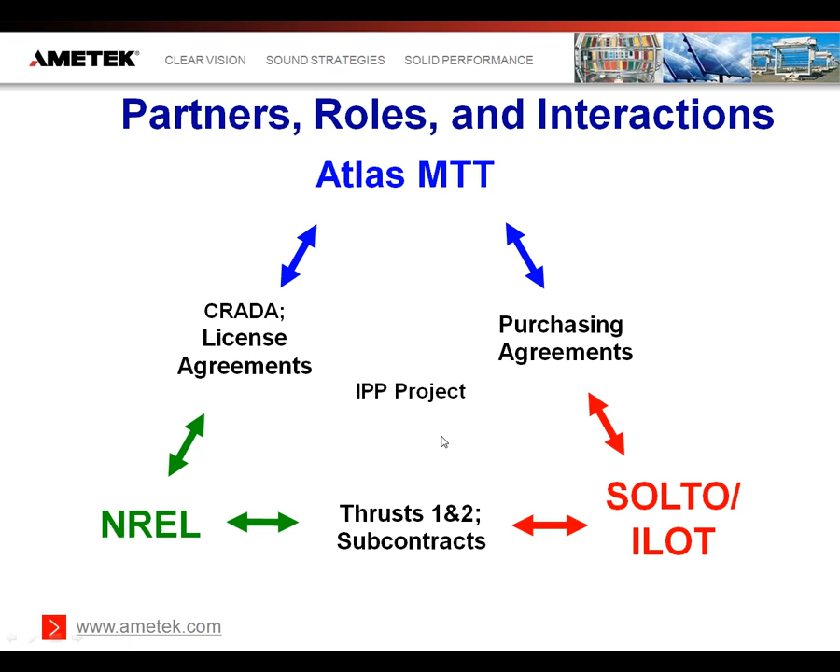It's truly a great event at several levels of context. Speaking of context, I have a general comment on the content you'll see this morning. We're going to review considerations for ultra-accelerated weathering from two points of view, both general and specific. In general, these considerations can be applied to any accelerated methodology. There are a number of ways to achieve weathering results very quickly, and certain principles apply no matter what technology is involved. But specifically, we're going to review methodology using a new commercial device that was developed under the IPP program, and experience with the ultra-accelerated weathering system, or the UAWS, really highlights the more general considerations. So if you think about both general considerations as well as specific aspects as the presentation unfolds, it might provide more value.

Well, to begin, let's set the context and talk about what we mean by the term ultra-accelerated. As we look back across weathering methodology, we can group approaches into three general categories with similar sets of considerations: real-time weathering, moderately accelerated weathering, and most recently, ultra-accelerated.

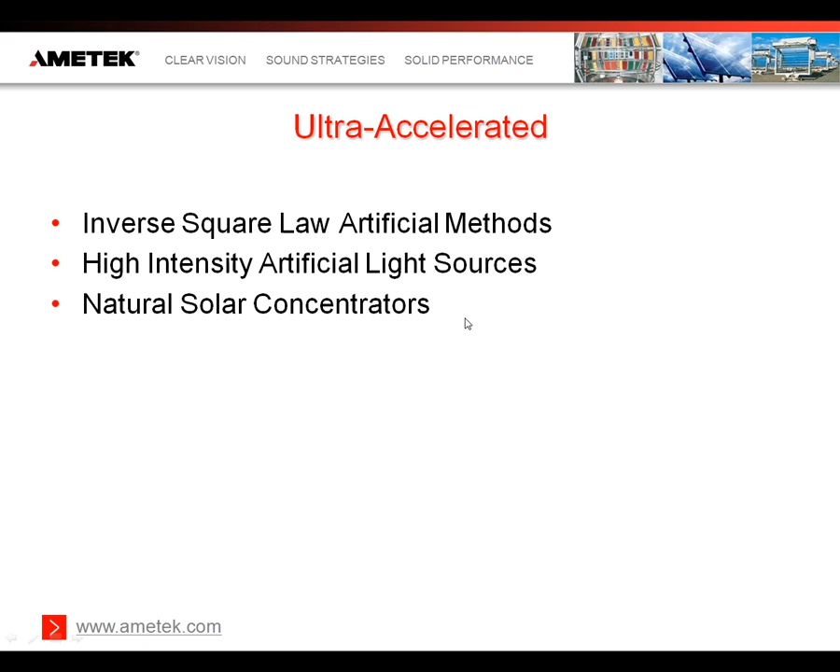So we can see this general developmental trend in weathering technology, but I want to emphasize three points. First of all, these methods should be used in concert. No good weathering researcher using accelerated methods should depend on the results of a single methodology. It's the preponderance of evidence from different data sources that should be used to characterize weathering behavior.

The second point is that real-time weathering is not optional. It's a requirement for good weathering research. It is the baseline, the reference for good weathering researchers, and good weathering researchers always precede accelerated weathering with real-time weathering.

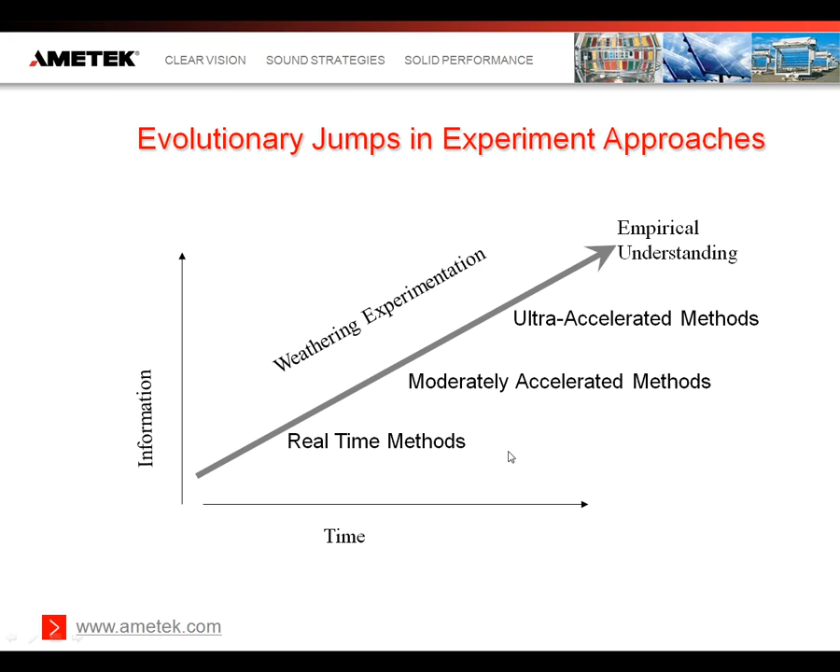And the third point is the radiometry. The measurement of UV radiant exposures in these methods is always a critical consideration. So with these general considerations mentioned, let's begin to discuss some more specific elements.

It's kind of ironic that what we're trying to do with our ultra-accelerated weathering concentrators is almost the exact inverse of what Lavoisier was trying to do with this. He was trying to generate great heat in the absence of oxygen in order to reduce oxides. We are trying to oxidize materials in the absence of heat, in order to photooxidize rather than thermally oxidize materials.

Anyone who's ever started a fire or melted a piece of plastic with a magnifying glass knows things heat up under solar concentration. Well, how do we keep things from getting too hot under concentrated sunlight? That would be the 800-pound gorilla sitting in our laboratories. So let's talk about this for a few minutes. I believe weathering researchers need to become experts in the application of the energy balance expression.

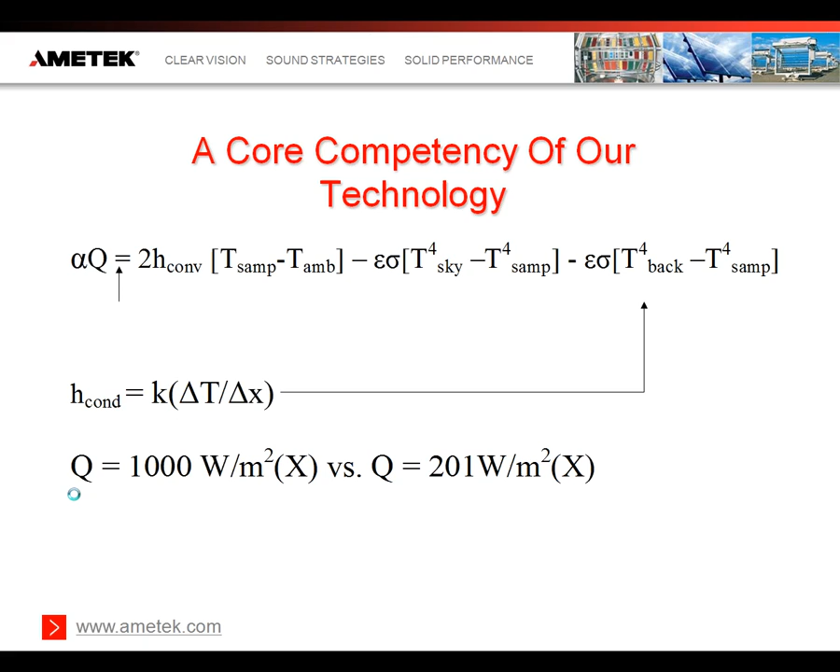Let's look at this expression in a different way. This is the same expression but solved for a specific case, the black panel temperature. And we're looking at this on an EMA device.

Now, even with no cooling, we can see a big reduction in temperature across all different concentration factors just by filtering out infrared from sunlight.

Now, most of our clients are a little concerned about exceeding a maximum end-use condition temperature, so they give us a hard ceiling right around 80 degrees C. And now our job is to exploit that energy balance equation and bring these black panel temperatures under 80 degrees C at these high concentrations.

Well, one of the easiest things we can do is simply add some convective cooling air. And if we add a 37 mile per hour blown air onto the black panel, we can achieve these reductions as predicted by the energy balance equation.

And if we do that with natural solar, we achieve predictions of our EMA exposure. These dashed lines now show the condition when we add convective cooling to the total solar and add convective cooling to the UV only temperature predictions.

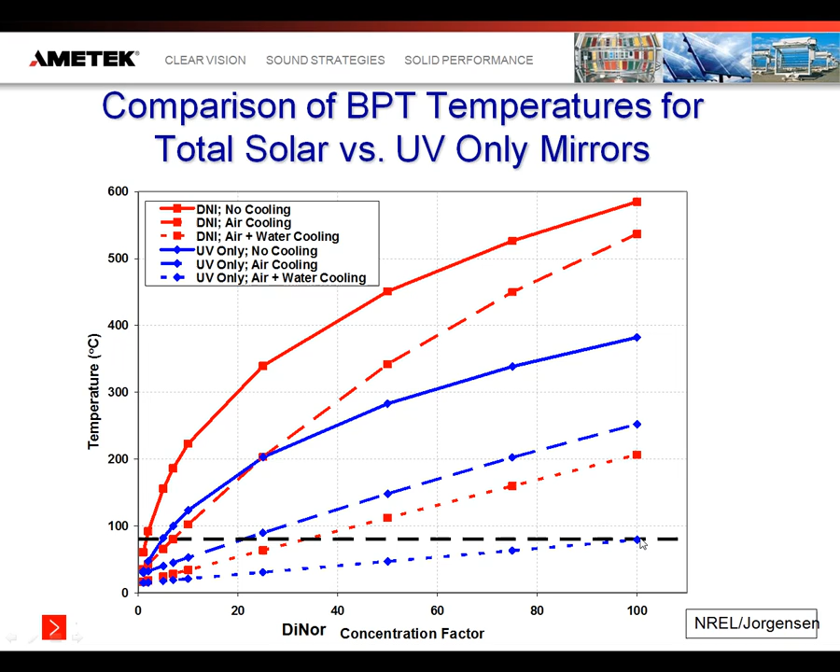The theoretical predictions are always based on assumptions that don't usually appear on the PowerPoint slides. So how does it really work?

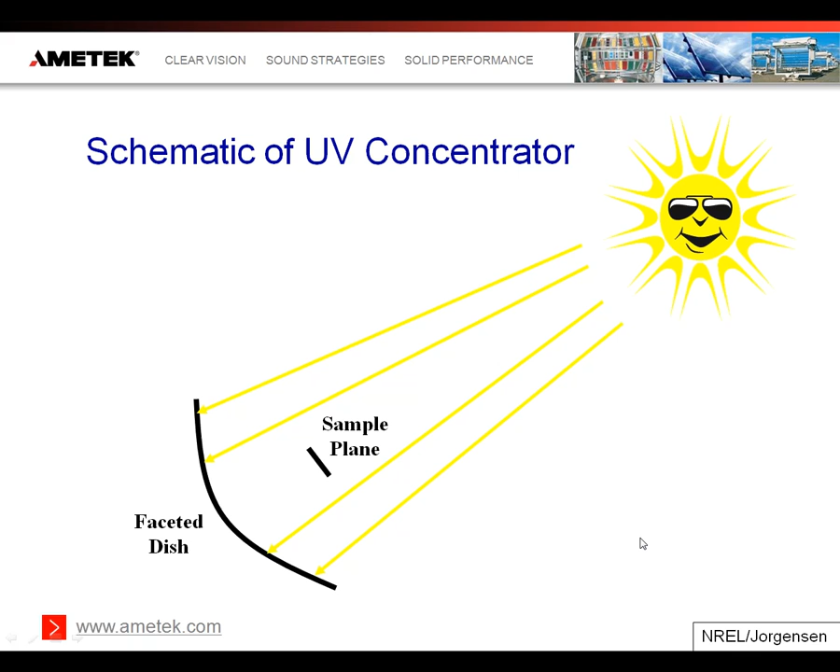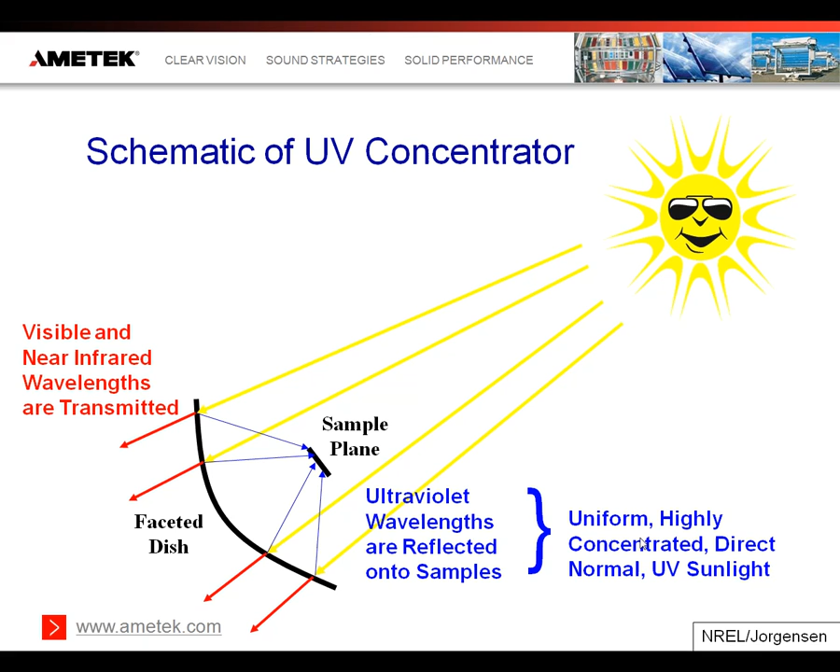We built mirrors that transmit visible and infrared but reflect solar ultraviolet onto a sample. The mirror surface is made up of many layers of two materials with very different refractive index. At specific thicknesses, the change in refractive index reflects specific wavelengths of light. You build up layer after layer on glass by evaporating metal oxides onto the surface under a very high vacuum, altering the thicknesses of the layers to obtain a specific reflectance spectrum.

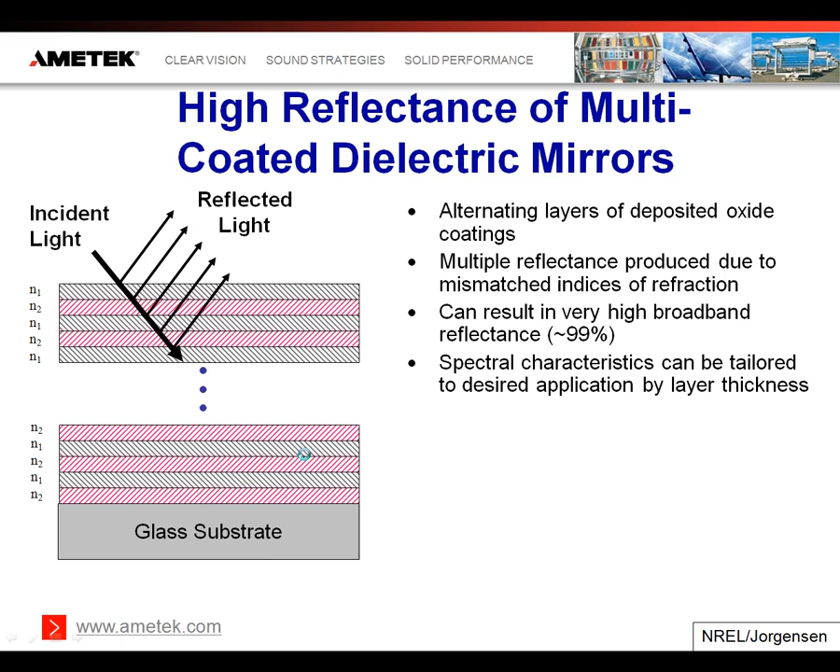It took a lot of long, painstaking work by our Russian partners, but we finally ended up with this reflectance spectrum for these mirrors. As you can see, the mirrors do not reflect much of the infrared, but have very high reflectance in the solar UV. The result is you will not reflect the wavelengths that only result in thermal load, and you'll end up with reduced Q.

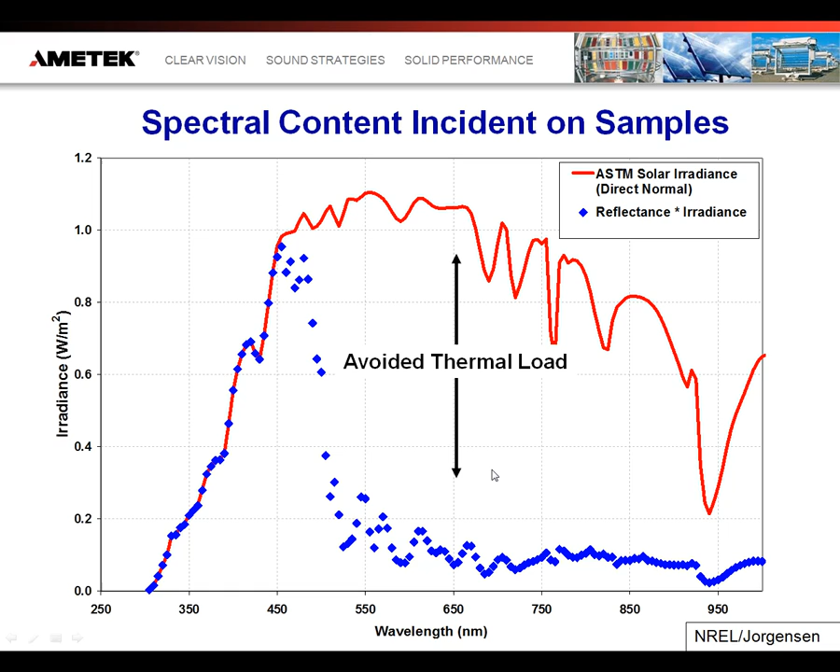But we still need to keep the wavelengths from the solar spectrum that have enough energy to break the bonds and initiate photooxidation. So we built a concentrator using these amazing mirrors.

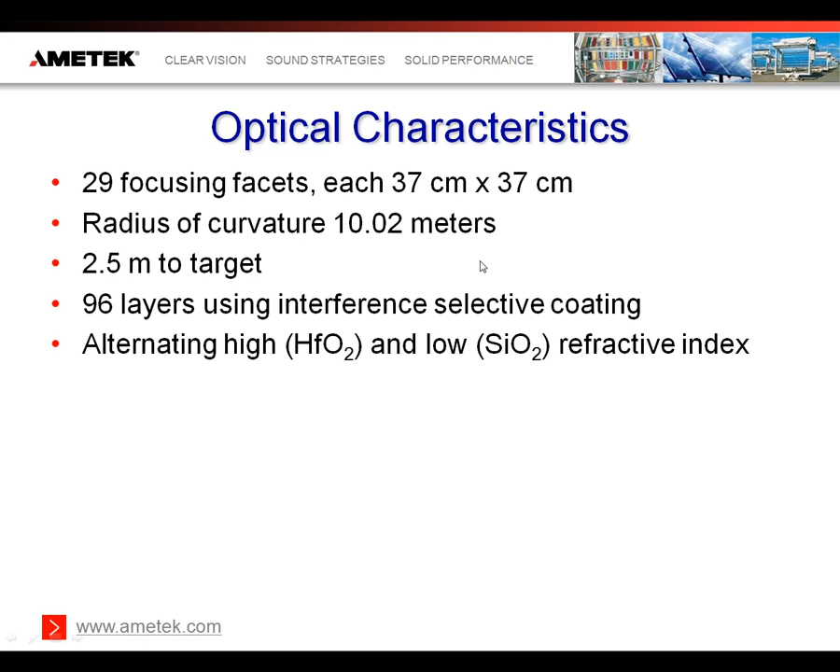We used 29 mirrors in the concentrator design, and we shaped the surface of the mirror to a radius of about 10 meters. These are focusing optics with a 5-meter focal length. We placed each facet on a 10-meter radius support structure, and then placed the target area about 2.5 meters towards the focal point.

We mount these facets onto the support structure, and mount the support structure onto a tracking mount that will allow this to follow the sun. Then we place a target area out where we will be focusing the solar radiation.

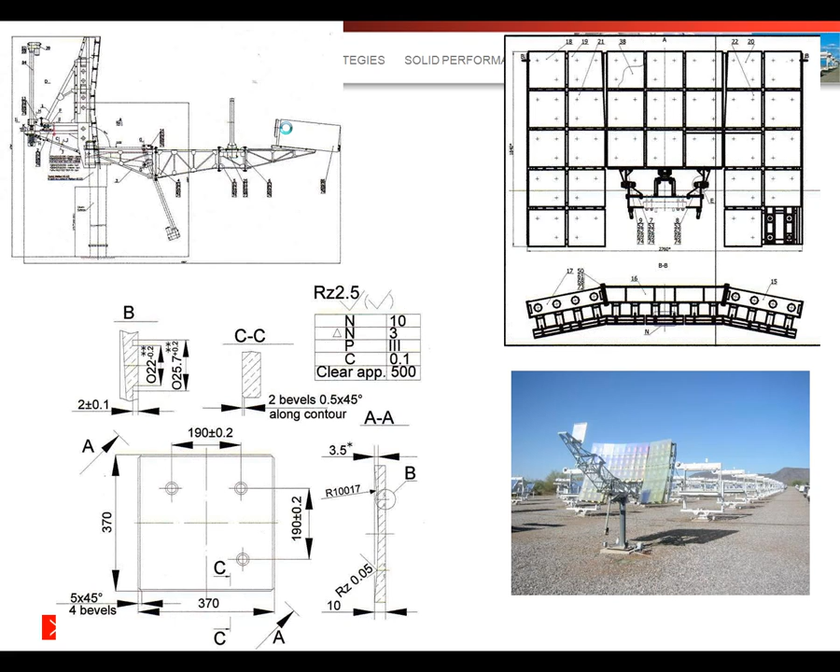There are two distinct features I want to point out about this design. The first is that the target area is not all the way out at the focal point of the optics. We have the ability to move the target area further back and achieve even higher concentrations than we'll talk about today, but there's a sacrifice in target area the farther towards the focal point we move it. So there's this inherent trade-off between concentration and target area.

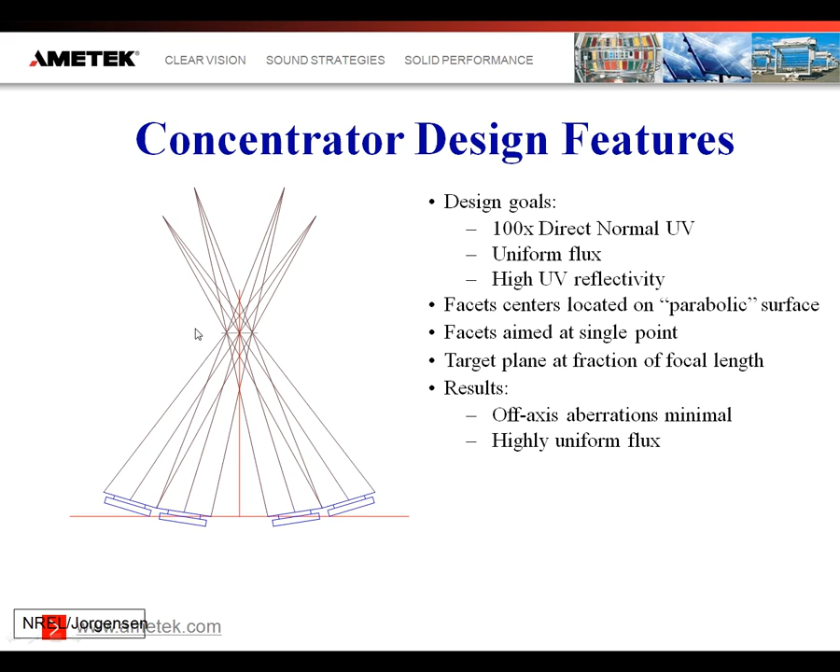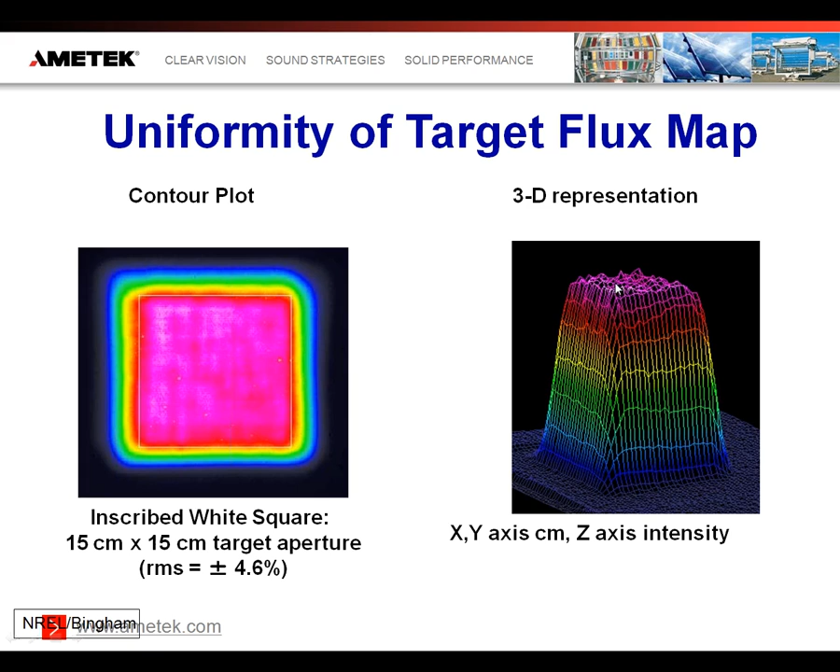One final note on that mirror surface: the evaporative coating appears extremely robust. 8 years ago I attached one of these witness coupons to the mirror bed of a traditional EMMA machine, and that sample had seen sun, rain, dirt, washing and abrasion, but it's still within the error of the narrowband UV reflectometer measurement. It's shown no measurable degradation.

Whenever you introduce a new weathering technology, usually the first comment you get is something like, 'Show me some examples of correlation.' So that's what we'll do now.

For initial studies, I wanted to show some materials with very different characteristics. So I chose a reflective paint and a transparent plastic to work with. These two are very different classes of materials: this is a thin film, this is a thick plastic.

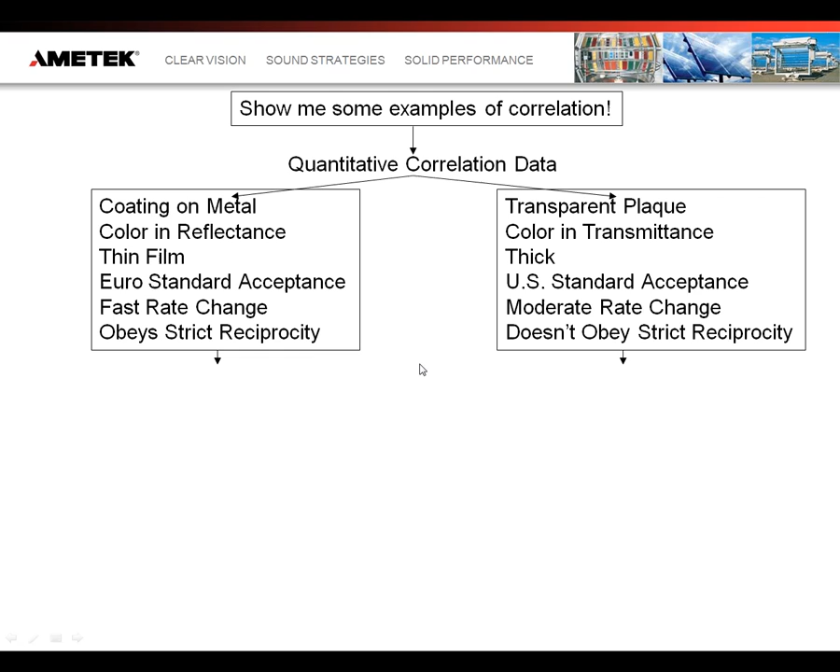I needed some initial data quickly, so I used fast and moderate rates of change. I wanted a material that obeyed strict reciprocity, and another that didn't — we're going to talk a lot more about reciprocity in a minute. I also wanted materials that had been exhaustively characterized, were instantly recognized by the industry, and were readily available for anyone who wanted to confirm my work.

Which led us to the ORWHET standard reference material and the polystyrene standard reference material, which fulfilled all the requirements and are specifically meant to be used as reference materials for testing weathering methods.

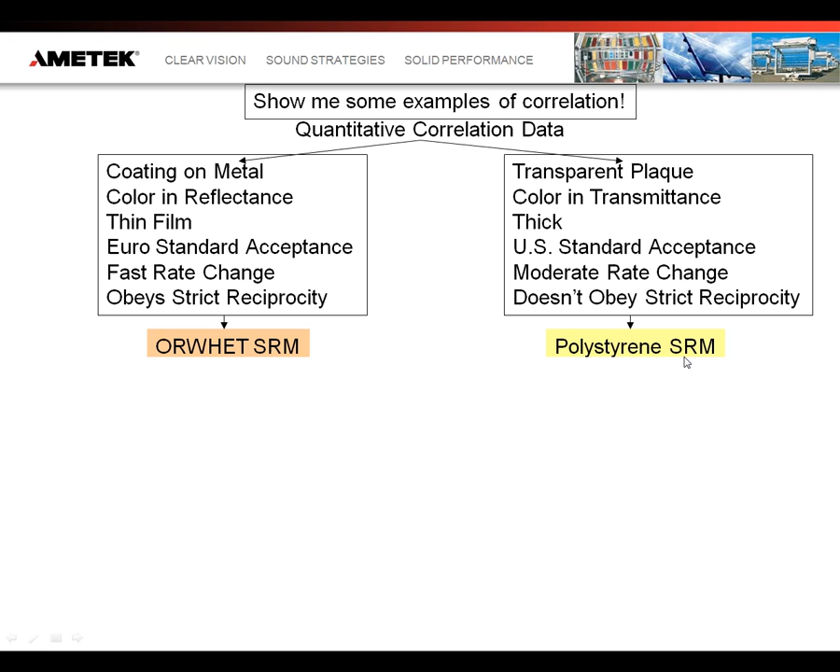Now the ORWHET is a European standard reference material, produced by EMPA. It's a pigmented thin film, a paint of melamine resin with a Ciba pigment on aluminum. It's been very highly characterized for color change as a function of UV exposure.

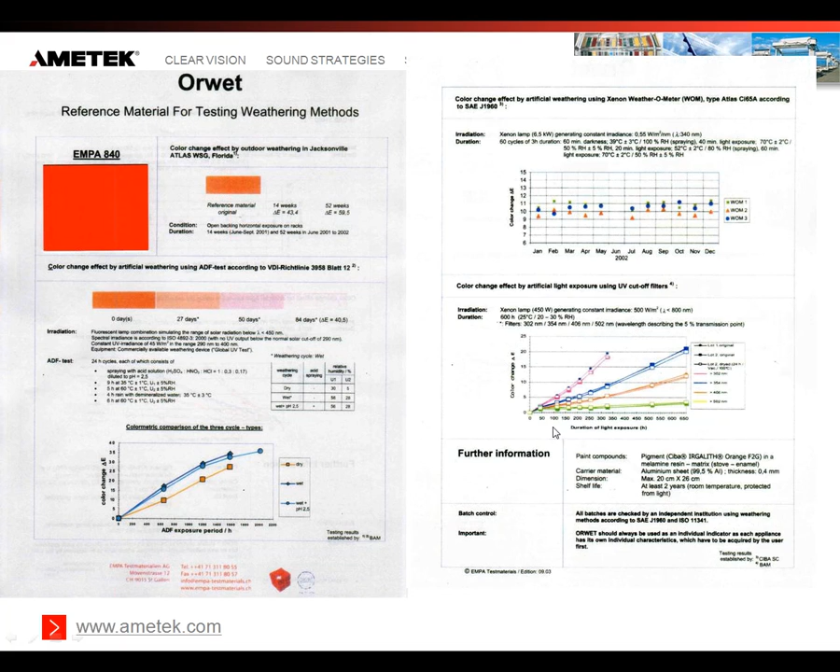Now the polystyrene is a United States standard reference material produced by IFAI. It's a thick, visually transparent thermoplastic, again highly characterized for color change as a function of UV radiant exposure.

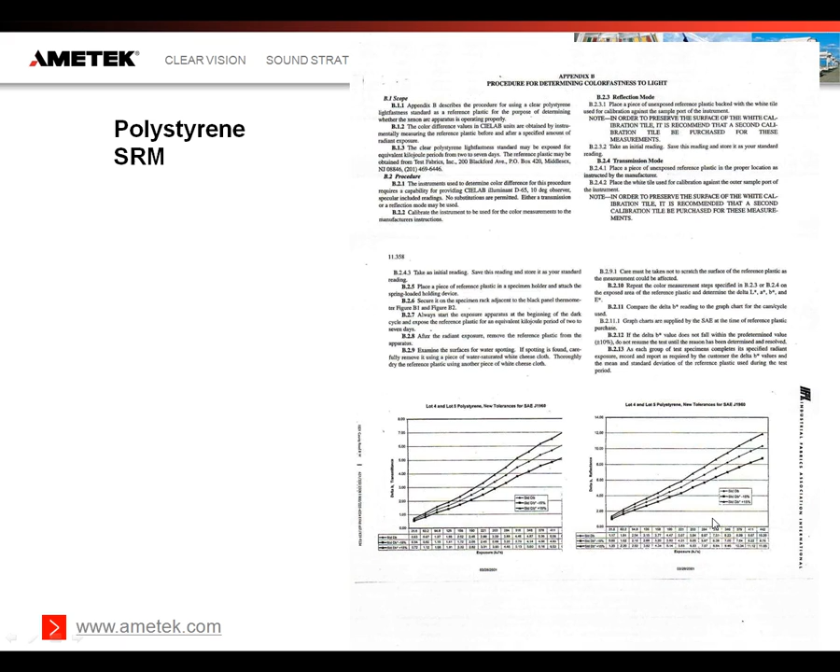Most people ask about correlation, but what they want to see is both the quantitative correlation, which tells us how well the new device simulates the natural degradation function, and also acceleration data, which tells us how fast the device will perform that simulation.

So we're going to look at two sets of graphs: one with the x-axis normalized across different exposures by radiant energy in joules UV, and another graph with real time on the x-axis. We're going to compare some real time, some moderately accelerated exposures, to ultra-accelerated exposures.

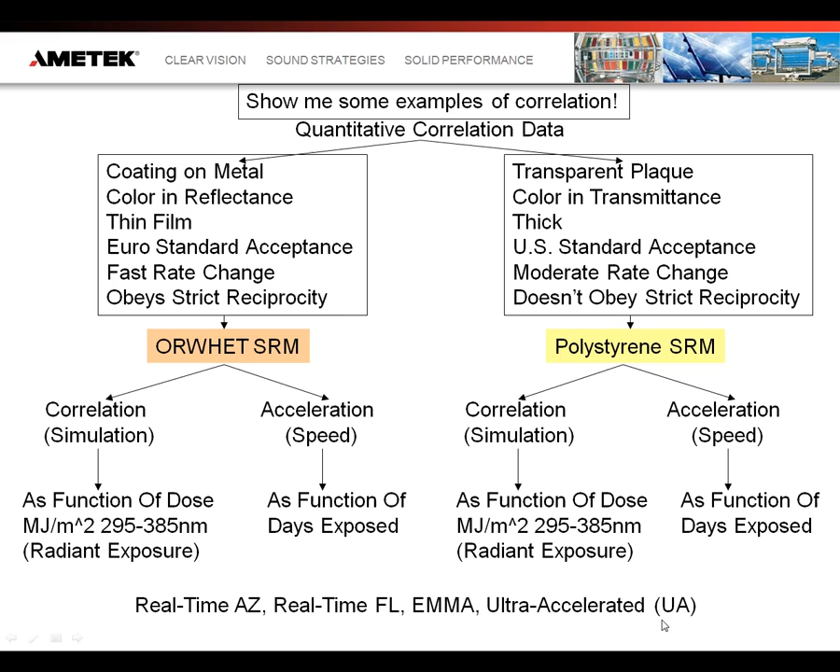Here we have a correlation graph comparing different exposures of the ORWHET SRM. In this correlation graph, we're normalizing for UV radiant exposure, or megajoules per meter squared UV, on the x-axis, and the y-axis is the property change as a function of UV exposure.

Here are three exposures: natural real-time. The RTs are real-time, and they are in Florida and Arizona. We also included a moderately accelerated exposure, the EMMA, which is also in Arizona. That's these three exposures here.

Now the red diamonds show that the ultra-accelerated exposure follows the Arizona real-time exposure very well. It really just doesn't get any better than this.

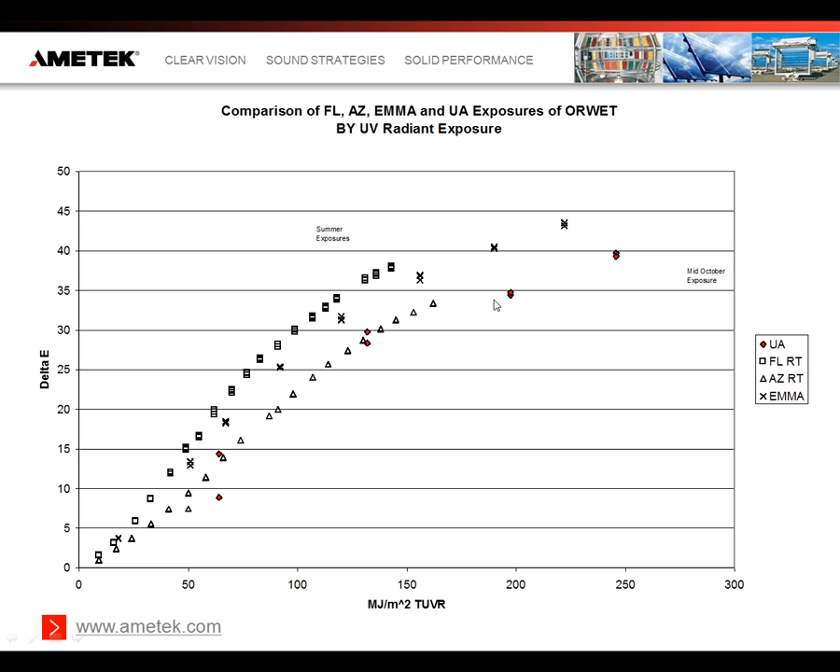And then you say, well, that's great, but how long did that exposure take in days? How accelerated was it? So now we're going to change the x-axis to days. What we see is that what took about 140 days in the real-time exposure took only 1, 2, 3, 4 days on ultra-accelerated. That would have taken about 60 days on the moderately accelerated EMMA.

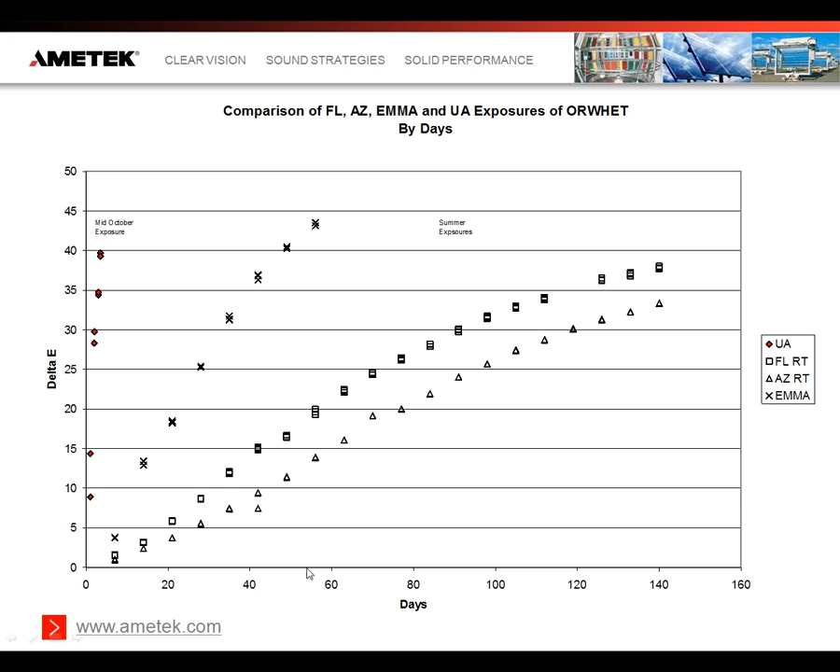So these two graphs, the correlation and acceleration of ORWHET, were the results of the first experiment on the new device. But it's not just a matter of exposing things to high irradiance.

Anyone can simply pump up the energy. Anyone can move a sample closer to a xenon source, use the inverse square law, or expose to multiple metal halide sources, or use more reflected images of the sun.

The trick is exposing specimens with ultra-high irradiances with ultra-high fidelity to the natural spectra without the specimens melting or burning. That's the trick, and it's not easy. And anyone who's run the energy balance calculation or done the empirical work knows it.

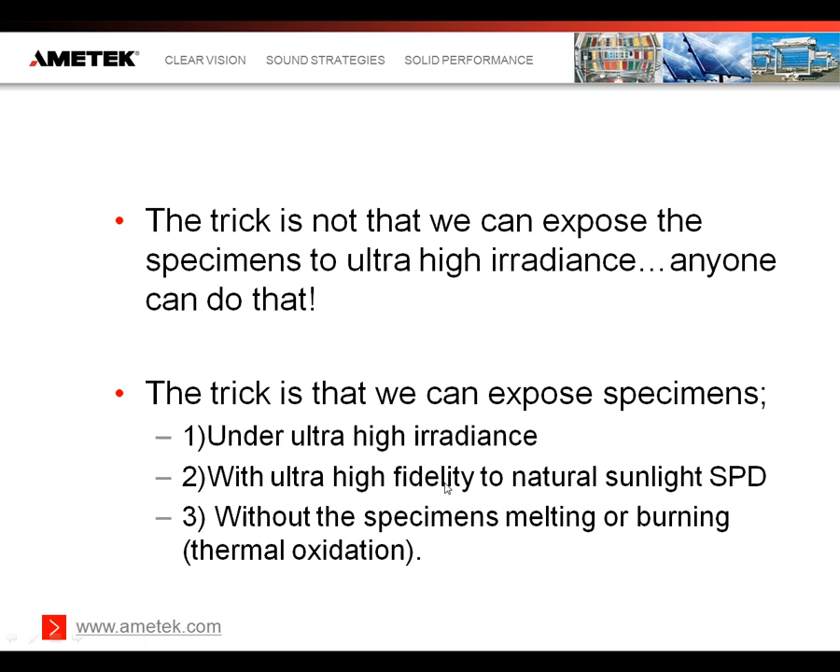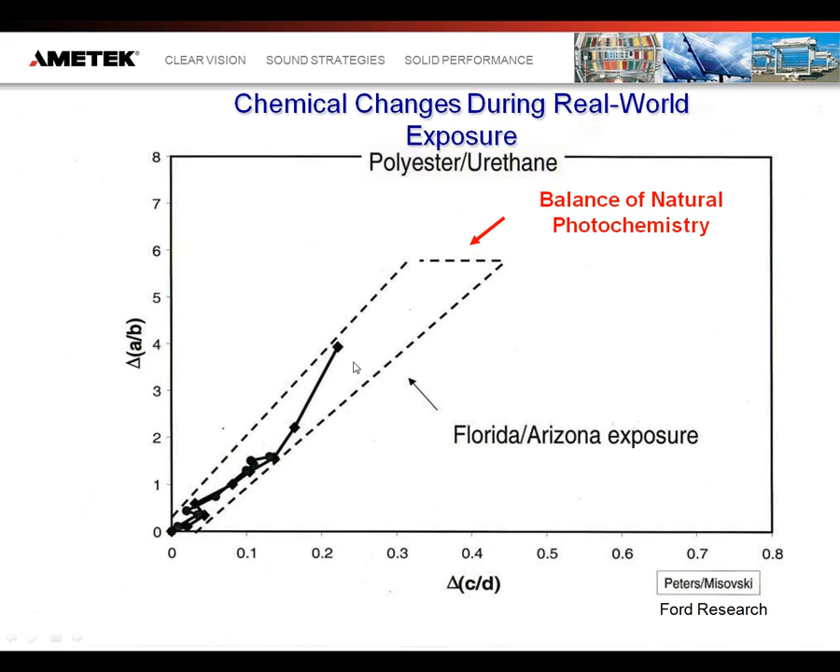But what's this bit here about spectral fidelity? In an extraordinary set of publications, Ford Research put forward what is pretty much now a generally accepted hypothesis: that in order to get the weathering photochemistry right, you have to get the light source to mimic the outdoor natural solar spectra. So Ford watched chemical changes in the natural weathering and compared them to the chemical changes under artificial light sources.

Now, one of the light sources showed exceptionally good simulation of the natural photochemistry, and that was the concentrated natural sunlight in EMMA, the ASTM G90 method. Since this work, Atlas, Ford, and Schott have developed a right light filter for use at moderate xenon acceleration.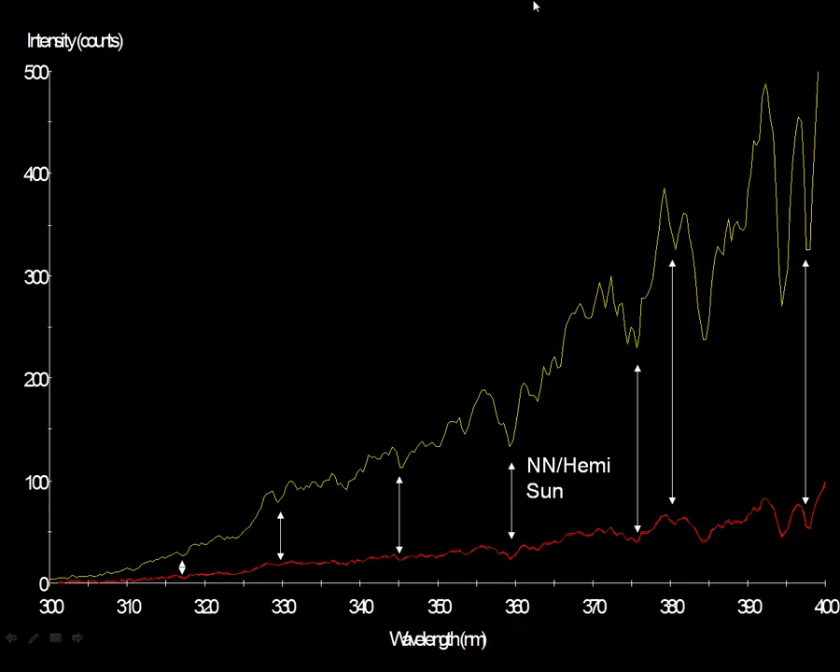Now, keep in mind that the new device we're working with now is an order of magnitude greater than EMMA, so fidelity may be extremely important.

At some point, we may have a problem because things are changing so fast we can't measure them with the proper frequency. Okay, great—acceleration for polystyrene. Now what about correlation?

We normalized the data by radiant exposure on the x-axis, and on this material we see departure from correlation. Although I've seen worse correlations published, and these trends are still going in the correct direction, we need to figure this out and understand what's going on here.

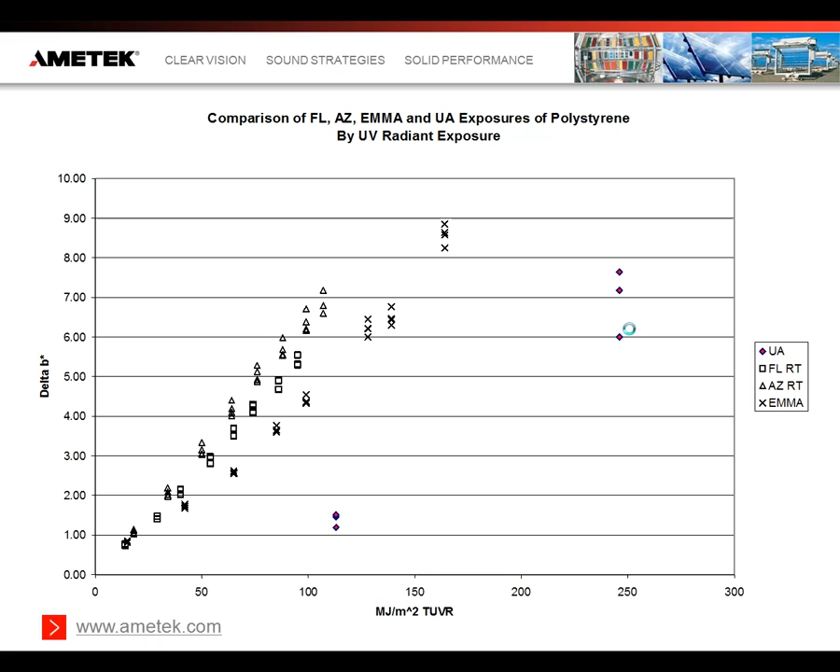This is where some in the industry go, well, let's skip the quantitative and use the Spearman rank correlation. Well, this is where we begin to talk about the other 800-pound gorilla sitting in our laboratories.

I first published on reciprocity in 2004. I wrote another paper on it in 2005, and a third in 2006. The concept of reciprocity is a foundational concept of our industry, and it influences our science whenever we time two

different exposures by radiant energy or dosage, or plot two different degradation curves with joules on the same axis, or infer the equivalence of 300 megajoules of UV in artificial exposure with a year in South Florida, or use a pulsed xenon source. It's the unspoken industry standard of operation.

It's an underlying assumption of much of the current weathering methodology. It's really the wisdom of the herd that's helped us evolve through moderate acceleration. When I began working with this, NIST referred to it as the law of reciprocity.

And it's really a simple logical concept. Materials react to energy, and energy is the product of intensity times duration. An exposure at twice the intensity for half the time is the energy equivalent to an exposure at half the intensity for twice the time. Watts, that's intensity, times seconds, that's duration, equals joules, energy.

And we time exposures in joules of UV. But at this point, the conventional wisdom of our industry makes a logical leap, and it says that within limits, these two exposures are equivalent, and they should result in the same property changes, all other things being equal. The within limits being that you can't get the intensity so high that you burn the materials, for example.

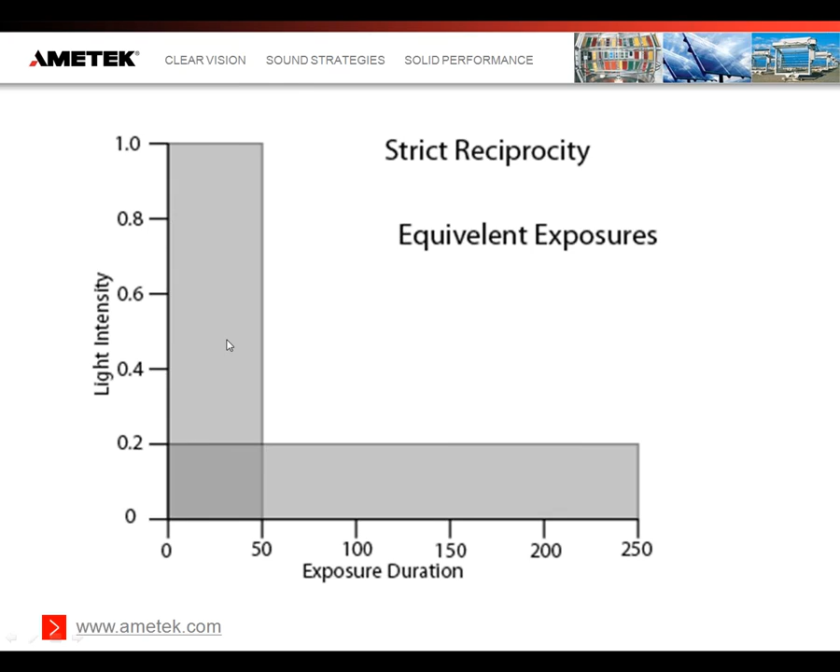You can characterize that concept in a function which has a characteristic shape and has the variable raised to the power of -1. That is a mathematical definition of strict reciprocity.

But around 2002, something happened to me that made me begin to doubt the human logic behind this universally accepted assumption. It required that we actually invent the apparatus we needed to study it, which, by the way, is patented—the temperature control EMMA suite of products at Atlas. We even have a patent on the methodology.

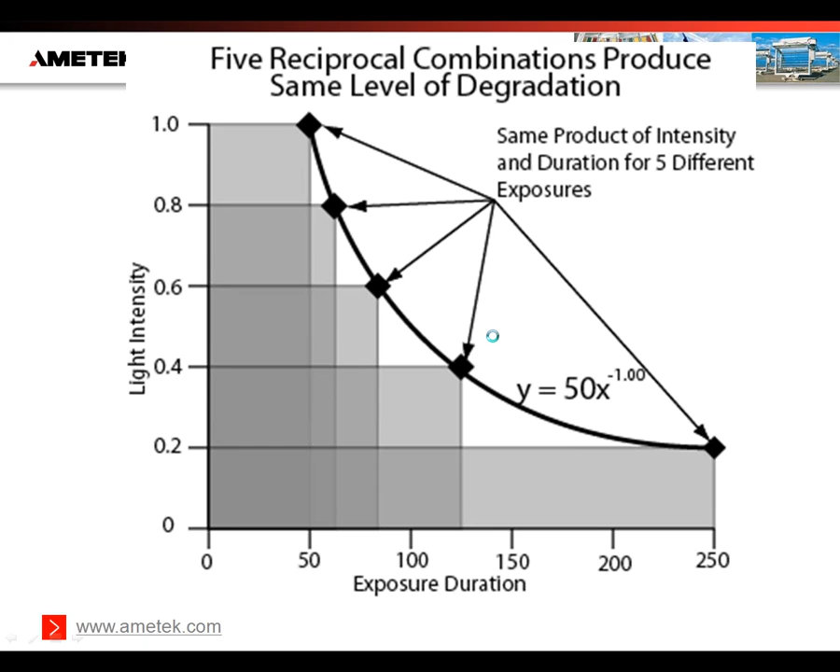So we tested our hypothesis with our new devices, and we compared predictions under the assumption of strict reciprocity with our observations. Once we had our data in a pile, we published this data at the Sedona Service Life Prediction Symposium. In this data, I normalized it to the results of a 10-mirror EMMA machine.

And I watched our observed values deviate from reciprocity as I removed pairs of mirrors while holding temperatures the same between these different exposures. The paper said that this strict reciprocity is no longer a valid assumption. We have observed significant deviations in controlled, repeatable experiments.

After I showed this graph, several other researchers stood up and confirmed the observations, saying they were using very similar values, like -0.63, as the exponent of their service life prediction models.

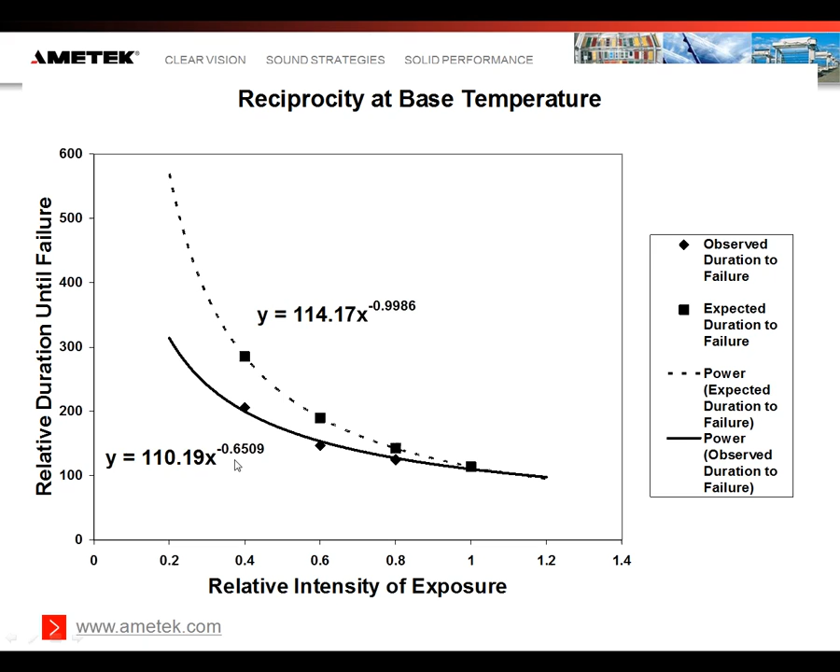Now I showed one more graph at the end of the presentation. That slide hypothesized what would happen if you took the intensity way out to ultra-accelerated levels. The crossover point here on this graph is a 10-mirror EMMA device.

That's moderate acceleration. And the pink dots are the observed deviation from reciprocity. If you follow these curves all the way out into ultra-accelerated territory, the assumption of strict reciprocity predicts that the polystyrene will degrade about twice as fast as the prediction calculated with the observed deviation from strict reciprocity.

The strict reciprocity prediction is here. It predicts the end of life in about half the duration of the observed reciprocity prediction. The observed reciprocity prediction is here, about twice as long as the strict reciprocity prediction.

Now at conventional method intensities, this effect can be lost in the noise. It's conveniently explained away. But at ultra-accelerated intensities, this becomes a critical consideration and it can't be ignored.

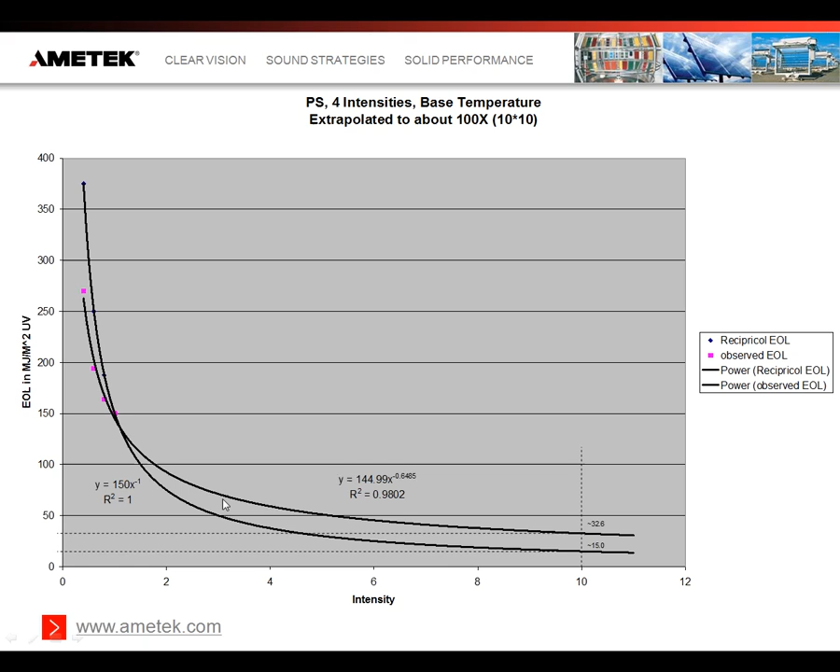Well, we waited about four years to be able to test this hypothesis. And you see how the strict reciprocity prediction takes about half of the radiant exposure of the observed reciprocity prediction to reach the same degradation point out here in this very ultra-accelerated area?

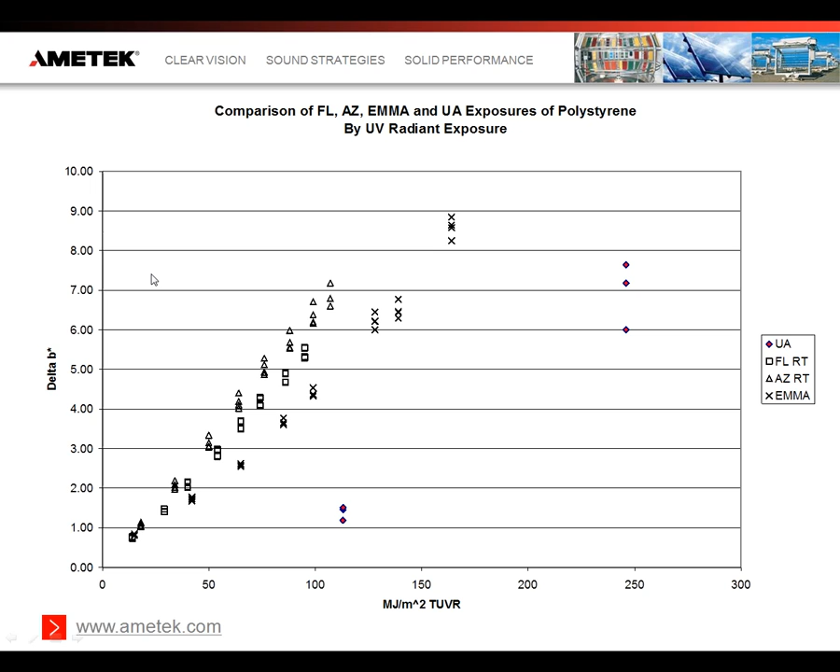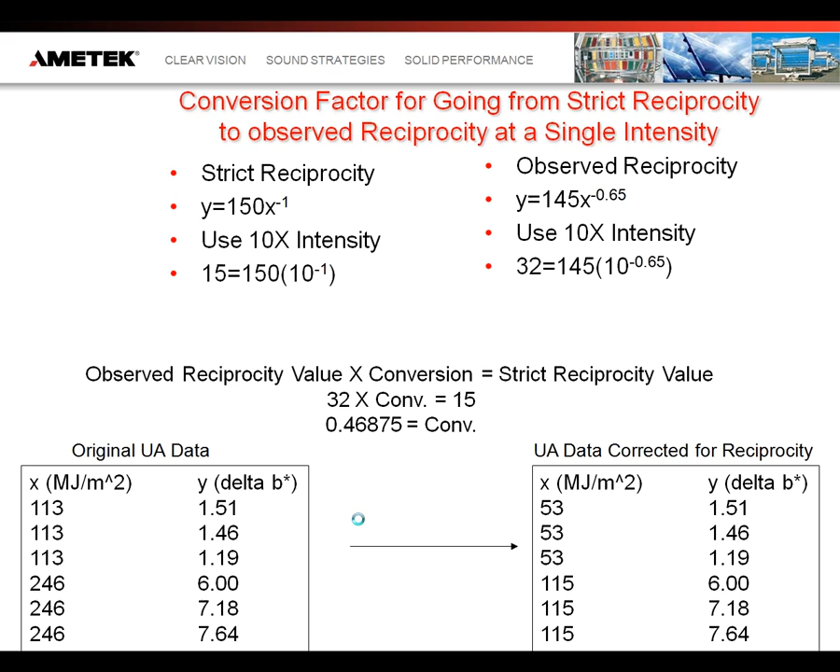Do you see how that real-time intensity takes about half of the radiant exposure as the ultra-accelerated exposure to reach the same degradation point? We've got the expressions and predictions at ultra-acceleration intensities, so we can do a back-of-the-envelope conversion of our observed ultra-accelerated results back to terms expected with strict reciprocity. When we perform that conversion, we get good agreement with the unaccelerated results. The issue is not the device or the acceleration.

The issue is the industry's assumption that all UV megajoules per meter squared are equal for a material. For this material, if we'd gotten data positioned anywhere else on the graph than where we observed it, the device would have been lying to us. Now that we're armed with this information, we can hypothesize why this ultra-accelerated data does not fall on the unaccelerated curve, even though they're both normalized for radiant exposure. Reciprocity is not a valid assumption.

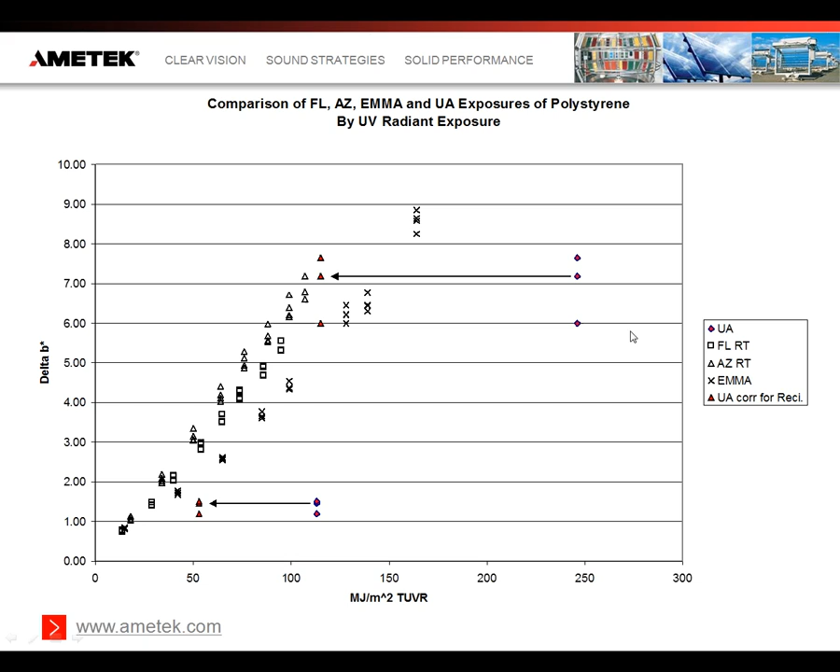Unfortunately, a goodly amount of our technology is built on that faulty assumption. At conventional intensities, deviations from strict reciprocity can be lost in the noise, the uncertainty of radiometric measurements, the material property measurements, or conveniently explained away. But at ultra-accelerated intensities, these effects are amplified. So for whatever reason, and we've hypothesized a reason and patented a possible solution, UV at lower intensities appears to have a higher apparent quantum efficiency than UV at higher intensities.

If true, this hypothesis has some pretty big ramifications in service life prediction. This is an example of the simplest case, an outdoor end use. We see the sun come up, and the specimens are irradiated with low UV intensities that have a higher apparent quantum efficiency. But as the sun approaches solar noon, the specimens are now irradiated with high UV intensities that have a low apparent quantum efficiency. And this is the simplest case in the real world. Here's the case with some minor clouds.

So now I'd like to welcome you all to true calculus-based weathering. This issue of reciprocity is critical in service life prediction application problems. But service life prediction is not the only use for ultra-accelerated methods.

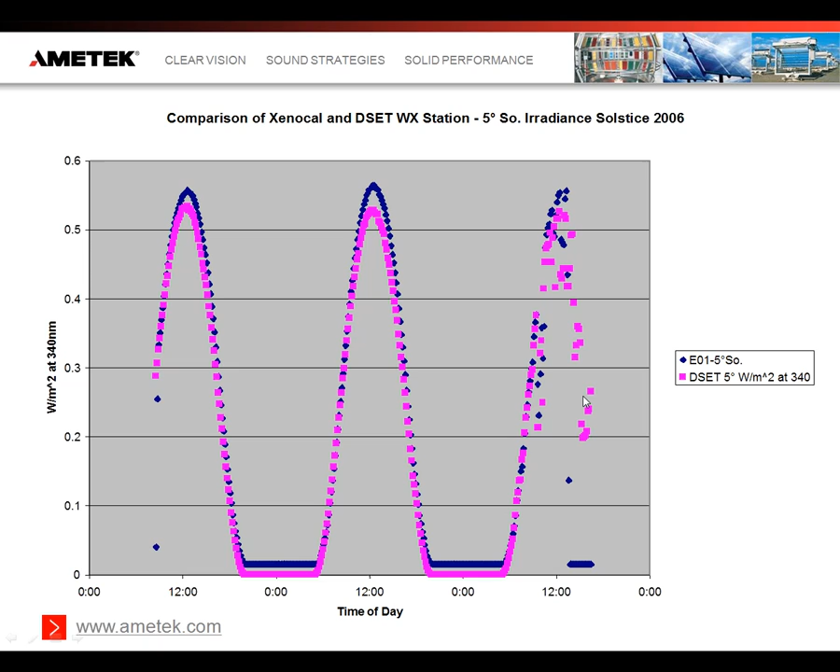In fact, we believe some of the most valuable uses will be for material and formulation screening work. Here's some work that NREL did with the prototype device on PC polycarbonate glazing materials.

In this exposure, NREL had two different types of polycarbonate materials. Here's type 1, here's type 2 results. One had a protective UV coating, the other did not. NREL tested these materials at 50% of the ultra-accelerated capability, and they still obtained this data in only several months. The manufacturer could quickly see the protection effect of the UV screen.

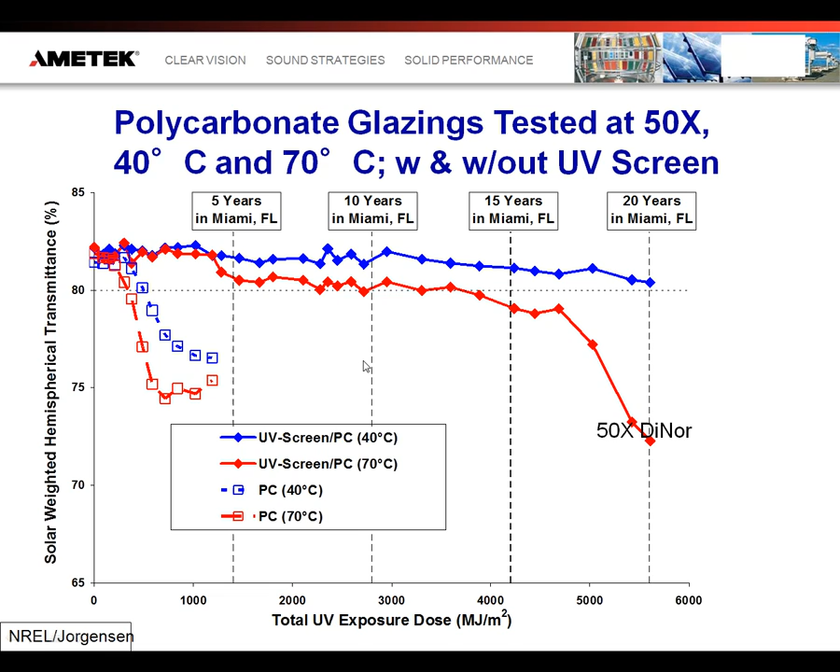Now these were done at two different temperatures, so they could also see the temperature variable effect. I think it's this kind of comparative screening work that we could really target with this capability to help our research efforts. In screening work, we're looking for comparative data between materials, additives, formulations, rather than service life prediction. We're looking for weak links and poor candidates.

The first thing we need to talk about in calculating radiant exposure of an outdoor device is the difference between global and direct normal irradiance. Just like the EMMA devices, the new ultra-accelerated weathering system only concentrates direct normal solar irradiance. That's light direct from the solar disk. That's called direct normal, or DNI, direct normal irradiance.

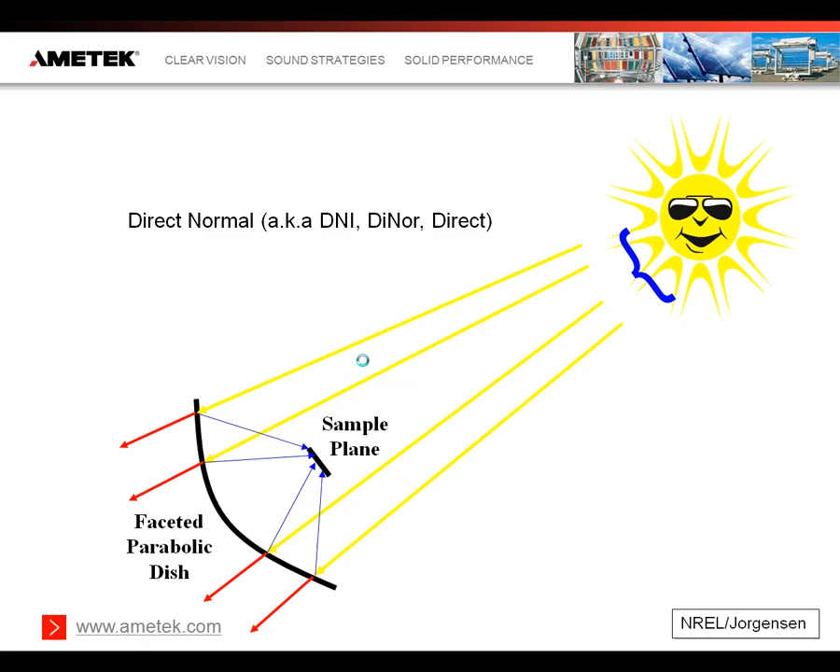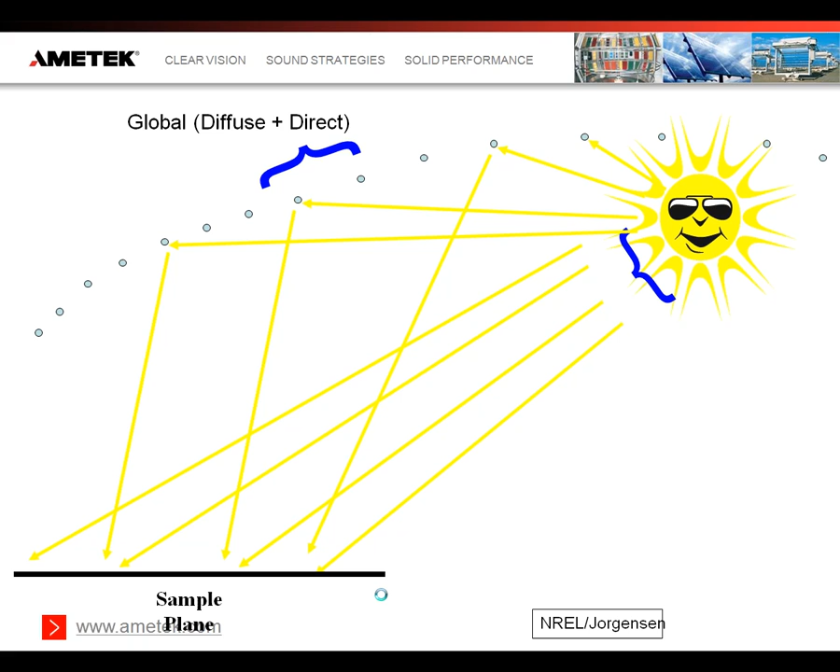Specimens exposed on horizontal real-time see light from the solar disk plus light reflected back from the entire sky dome—that's the direct plus the diffuse component. It turns out there's about twice as much UV in the entire sky dome than there is in just the direct component. That exact ratio is always changing with the always changing sky conditions.

We can look to the ASTM G90 EMMA standard as a guideline for radiometric measurements in ultra-accelerated methods. As it turns out, the radiometry methods in the EMMA standard are a really good starting guideline for radiometry in ultra-accelerated solar concentrators of this design, with a very important modification.

The most popular method within the G90 standard involves the use of two UV radiometers with a response in the 295 to 385 spectral region. Both of these radiometers are pointed directly at the sun and track it as it moves across the sky dome during the day. And just like the ultra-accelerated concentrator, this tracking maintains these radiometers pointed directly at the sun and follows its path.

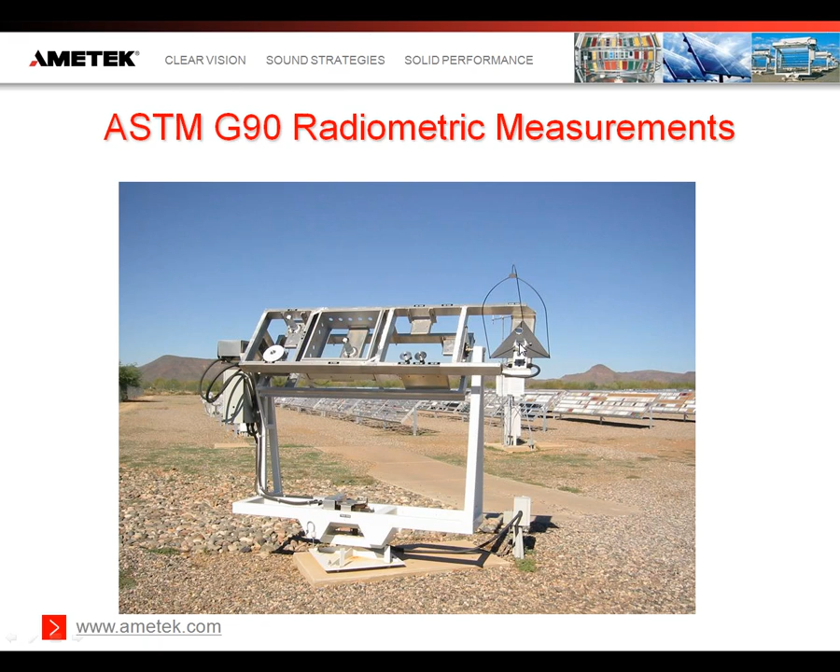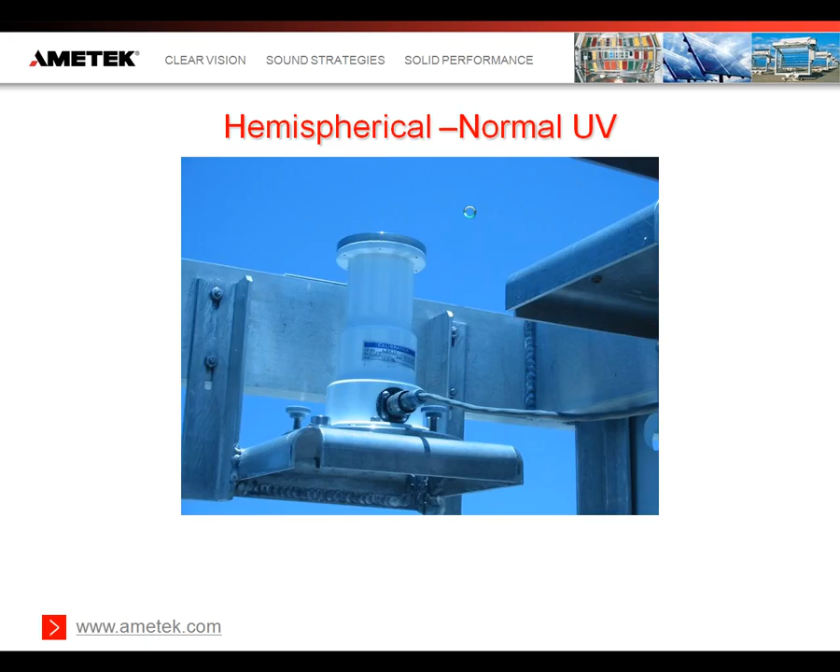Now, one of these UV radiometers measures the light direct from the sky dome—both the light direct from the solar disk and the light reflected from the blue part of the sky, the diffuse component. The other radiometer measures only the diffuse component.

It has a shading disk which excludes the direct normal component, excluding that 6 degree circumsolar part of the sky. So only the diffuse energy is measured.

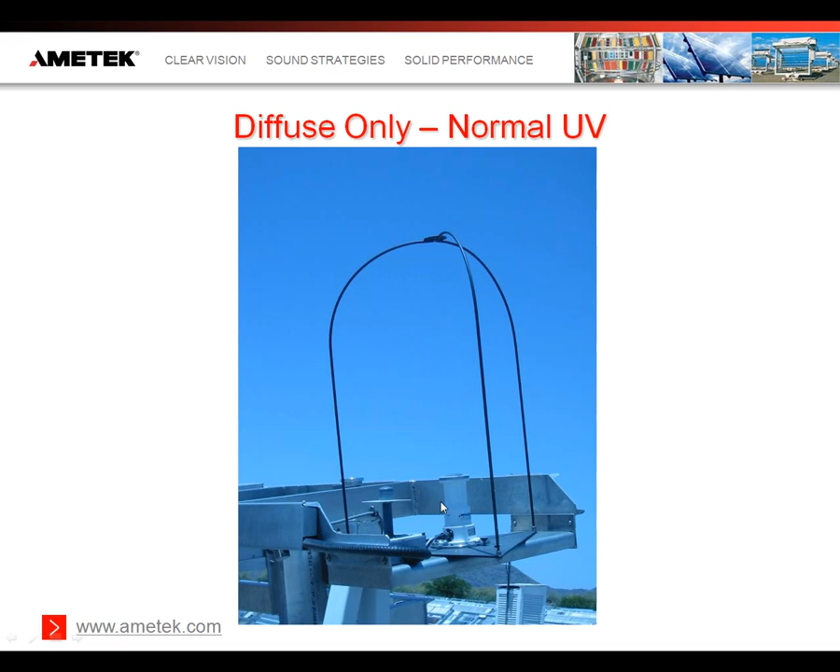Once we measure the total component and the diffuse component, we can simply subtract the diffuse UV from the total UV to observe the direct normal UV. Total minus diffuse equals direct. So now we have the direct normal UV, which is the only light the collector reflects onto the specimen.

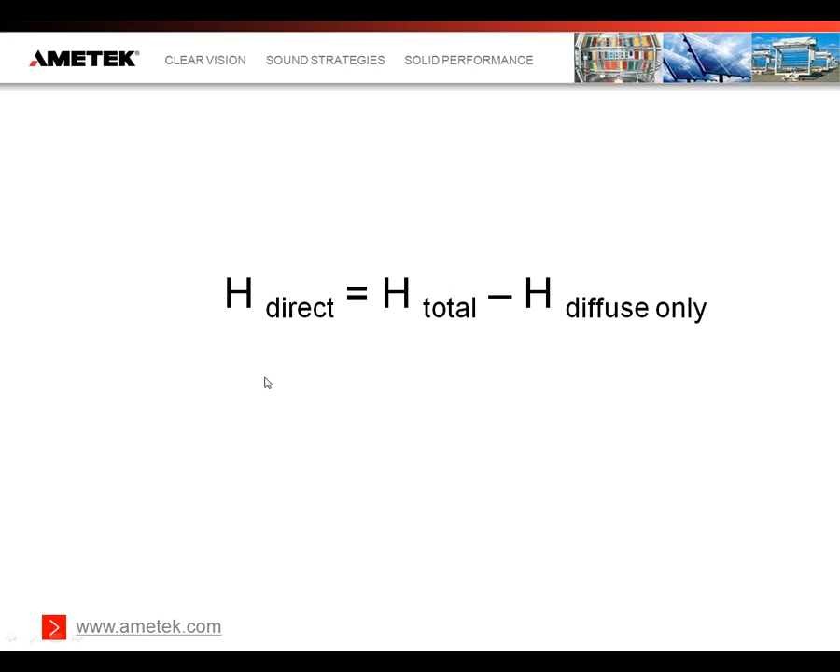And this is all clearly outlined in the ASTM G90 with diagrams and explanation. The next thing you do in the G90 procedure is take this incoming direct normal UV and multiply it by the concentrator's optical constants.

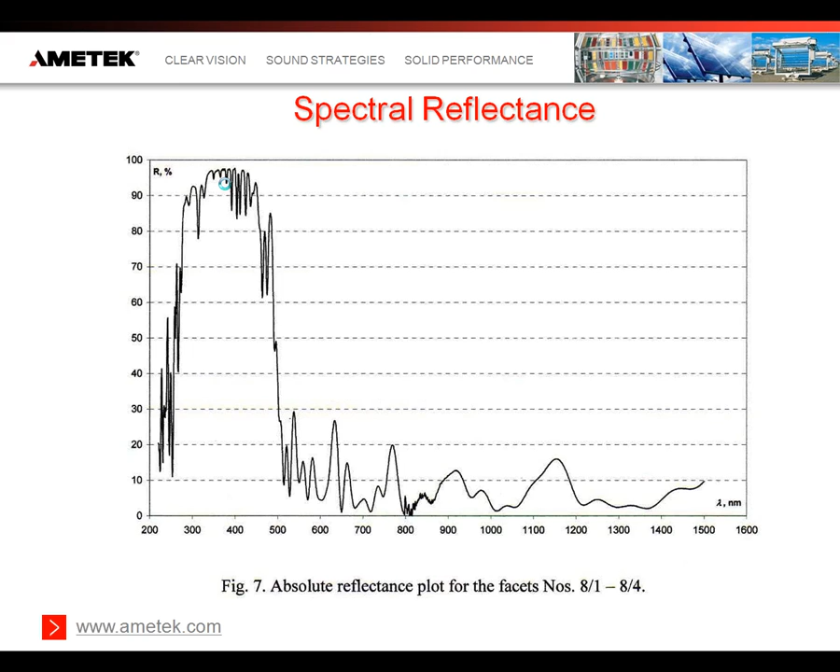So you multiply the incoming UV by the integrated reflectance of the mirrors. We measure and integrate that directly in our optics lab, and we saw the reflectance graph earlier. We're using 0.95 for these facets. Then you multiply that by the number of mirrors, and we usually use 28 facets for 100% capability on this device.

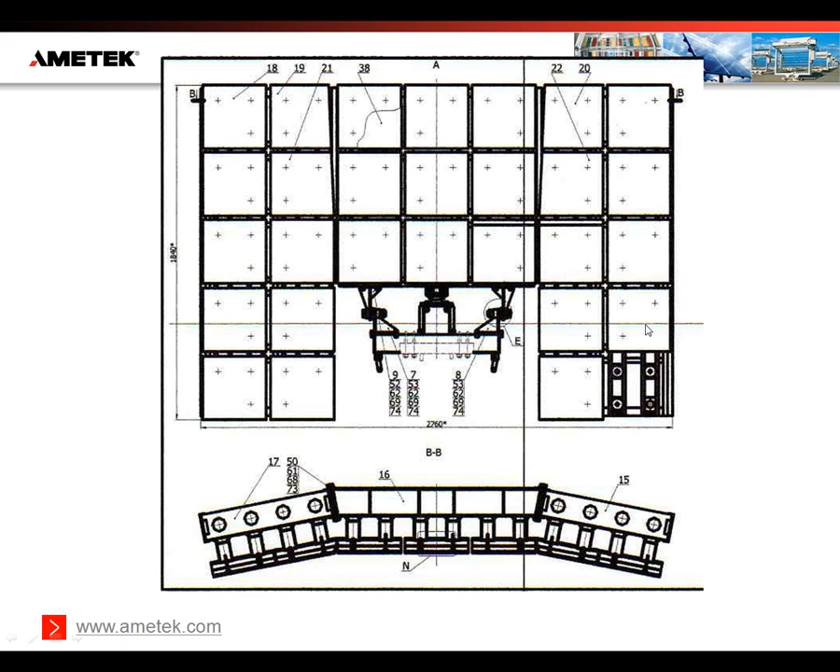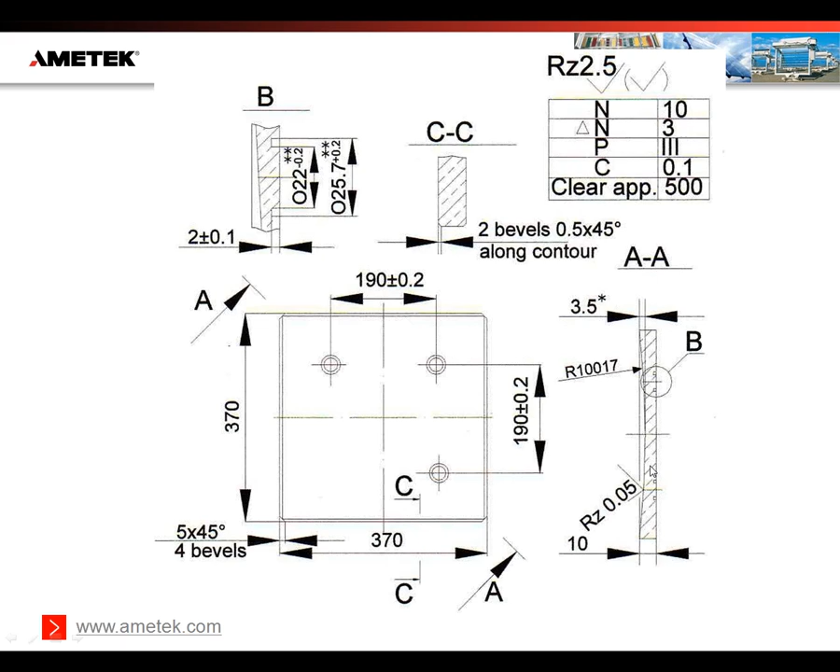Finally, we must do one more step that's not in the G90 procedure. Since the facets have a radius, they're true focusing optics, we must also multiply by the concentration ratio. We simply take the ratio of the reflector facet size to the target area size and use that as the concentration factor for each facet. For the geometry we're currently using, that's a factor of 4 because of that radius.

So in summary, it's the direct normal UV from the shaded and unshaded radiometers, multiplied by the UV reflectance of the facets measured in the optics lab, multiplied by the number of facets, and multiplied by the concentration ratio determined geometrically. That's how we're calculating the radiant exposure on specimens in the target.

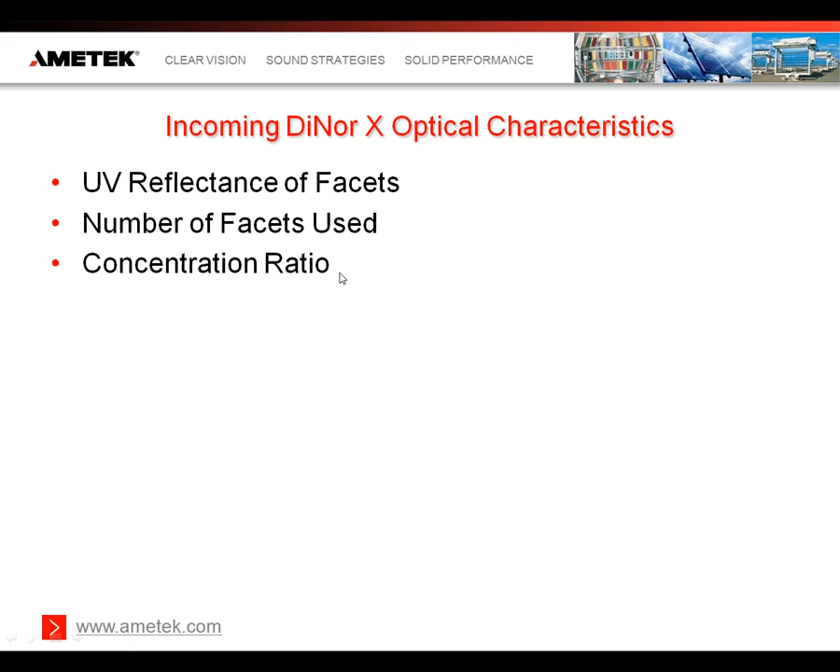Now, how's that working for us? It's great. It's easy. The infrastructure already exists at the lab. The standards community has already developed a good method. We just adapted it a little bit, and it makes perfect theoretical sense, and we're getting really good empirical confirmation.

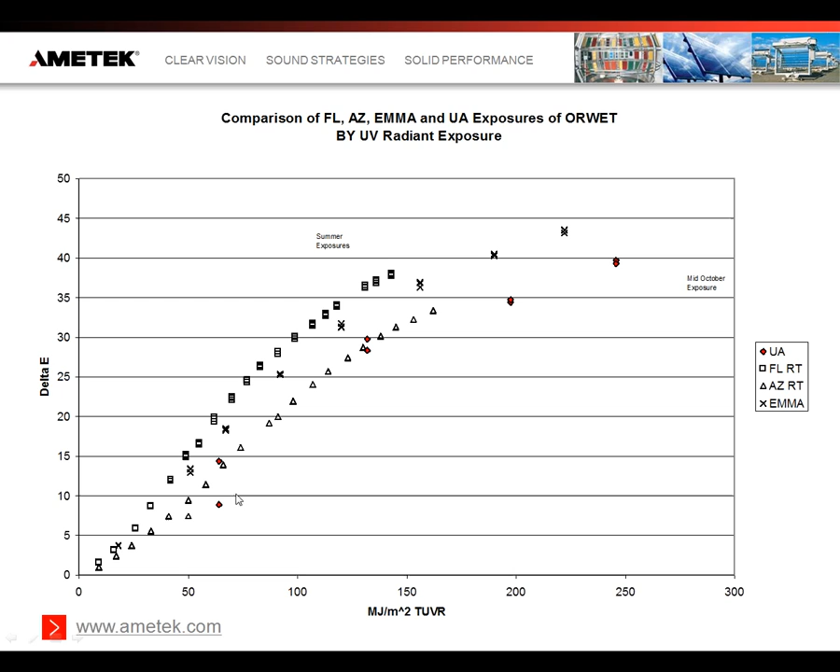That Urethane correlation curve used this radiometric method to determine the x-axis. If there was anything significantly wrong, the correlation graph would not have looked so good. But just to make sure, I decided to bake some of Atlas's XenoCal radiometers one day.

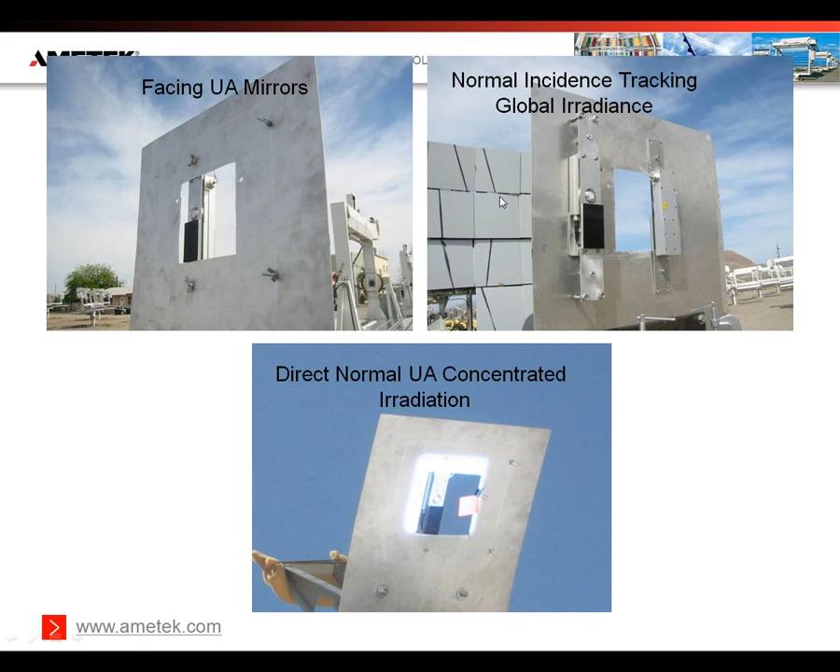I mounted one xenocal facing the reflector, in the target area, and exposed it to concentrated direct normal light from the solar disk. I mounted an identical xenocal facing the sky and simultaneously exposed it to normal global light from the sky dome. Of course, I value my xenocals, so I only used a fraction of the concentrator facets. And this is what we find.

We observed the sky dome with about 0.54 watts per meter squared incoming global UV. Now we should be able to predict the irradiance in the target area from this value.

So we take our global incoming UV and multiply by the ratio of direct normal to global. Then we multiply that by the number of facets we were using, multiply by the concentration factor for each facet, and multiply by the reflectance of the mirror coating. And we found a reasonable agreement between the calculated value and the observed value.

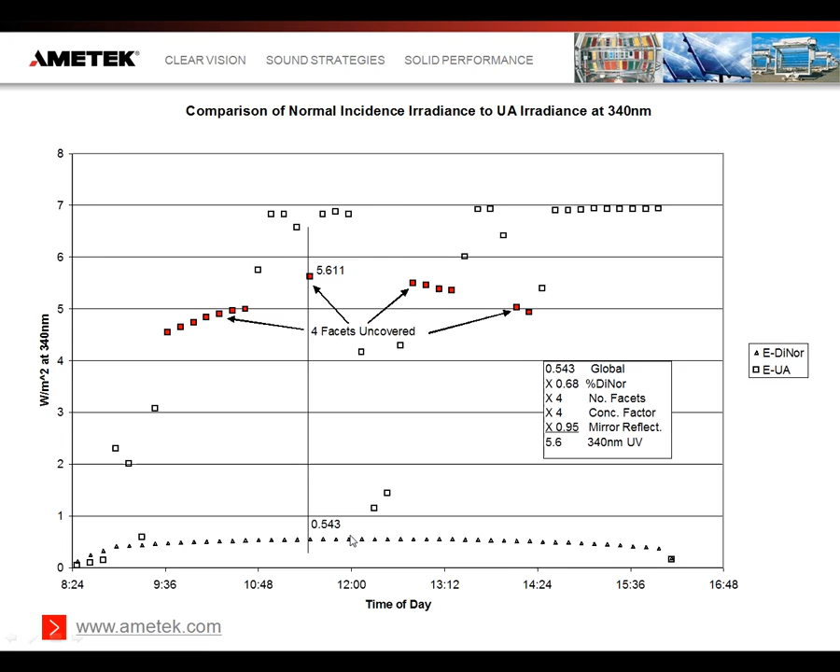Always keep in mind that the concentrator only uses direct normal light. The light we measured here is global, that's direct plus diffuse. So now that we've demonstrated confidence in the radiometry several different ways, we can discuss the radiant exposure acceleration value to the community.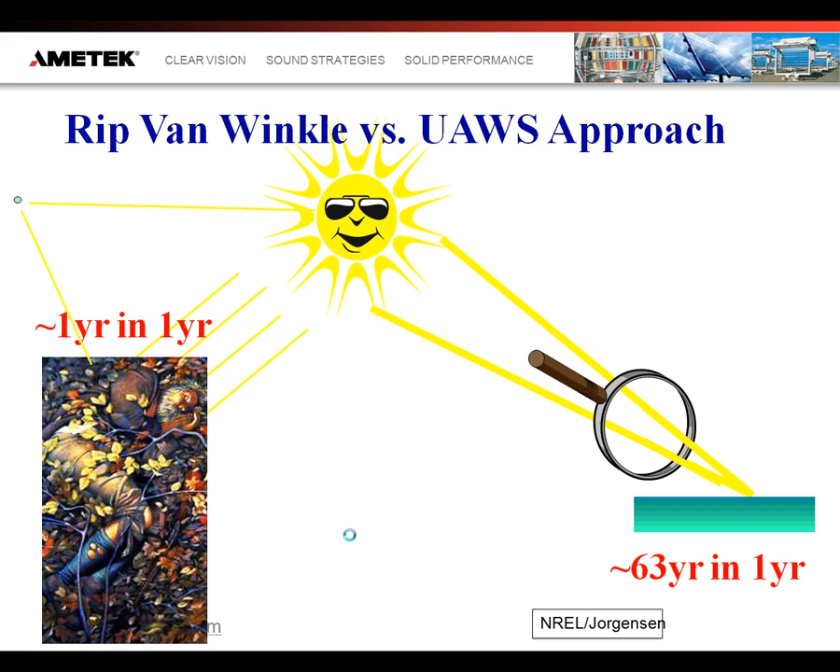We can back out an average total direct normal UV radiation from our historical measurements, and we averaged about 162 megajoules per meter squared UV direct normal per year at the laboratory.

From that, we can estimate a year's UV radiant exposure in the ultra-accelerated target area based on the number of facets, their optical concentration, and the mirror reflectance. We average about 17,000 megajoules per meter squared UV in the target area of the ultra-accelerated weathering system per year.

Now with that, we can compare back to an average year radiant exposure on 45 degrees in South Florida. We average about 275 megajoules per meter squared UV on a 45 degrees South Florida exposure.

Finally, we can ratio the ultra-accelerated to the South Florida 45 degree UV radiant exposure. This is the message we're publishing, the nameplate capability, if you will, of the ultra-accelerated weathering system. You can get about 63 years of South Florida 45 degree UV radiant exposure in a single year ultra-accelerated, and this actually leaves us with a little additional capacity over the nameplate capability.

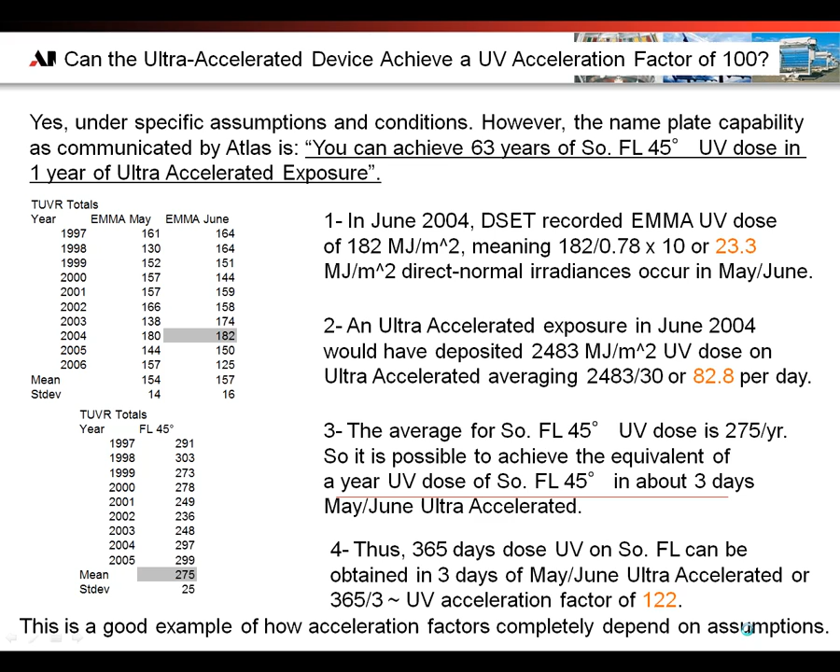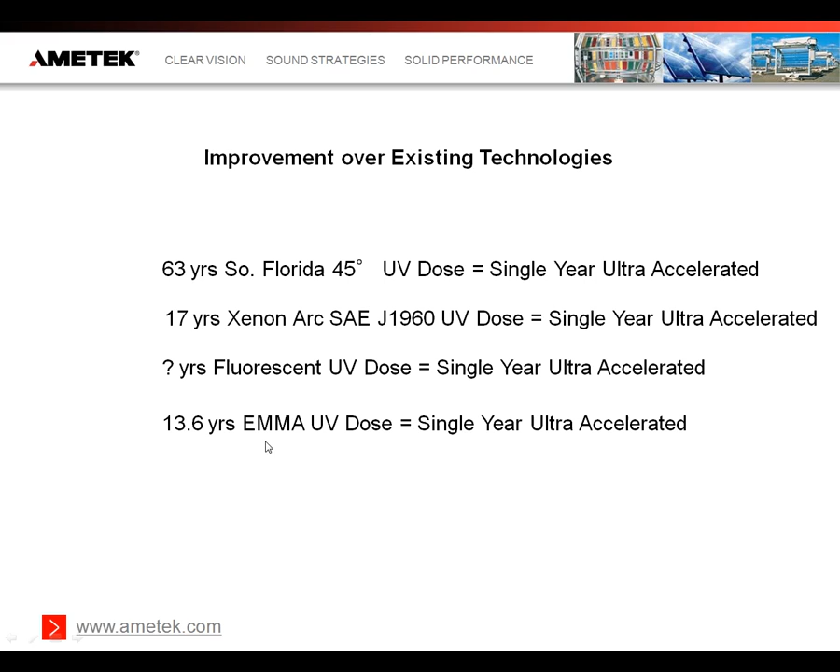How does this improve over existing technologies? It should take about 63 years in South Florida, 45 degrees, to achieve the same radiant exposure as a single year on the ultra-accelerated device. It would take about 17 years in a xenon arc under J1960 to achieve the same radiant exposure as about 1 year on the accelerated device. I'm still working on the fluorescent, but it would take about 13.6 years on the EMMA, the ASTM-G90 device, to achieve the same radiant exposure as a single year on the ultra-accelerated.

By using these mirrors, we've really reduced Q, the amount of energy heating the specimens, while simultaneously concentrating almost all of the ultraviolet. But as the energy balance predicts, we've got additional opportunities to work on the variables on the right side of the equation to get the specimen temperatures where we want them.

We've also developed other opportunities to take advantage of the flexibility of the ultra-accelerated weathering system platform. For lack of a better word, I'm calling these activities customizations, since we can do different things for specific material characteristics and exposure needs. For example, the customizations we make for thin paint on aluminum will be different than for a thick, absorbent, pigmented polyolefin or transparent acrylic. The first customization we did was to add backside cooling with a water-chilled cooling plate.

Here's the cooling platen in the target area, and you can see the supply and return umbilicals to the water chiller in the background. So we have chilled water flowing through the backside of the target area. Here you can see the target area, with some acrylic and some PMMA clamped to this backside chilling platen. There's actually two plates here—I painted one black for an experiment. You can see this design used bolts to clamp specimens to the cooling platen.

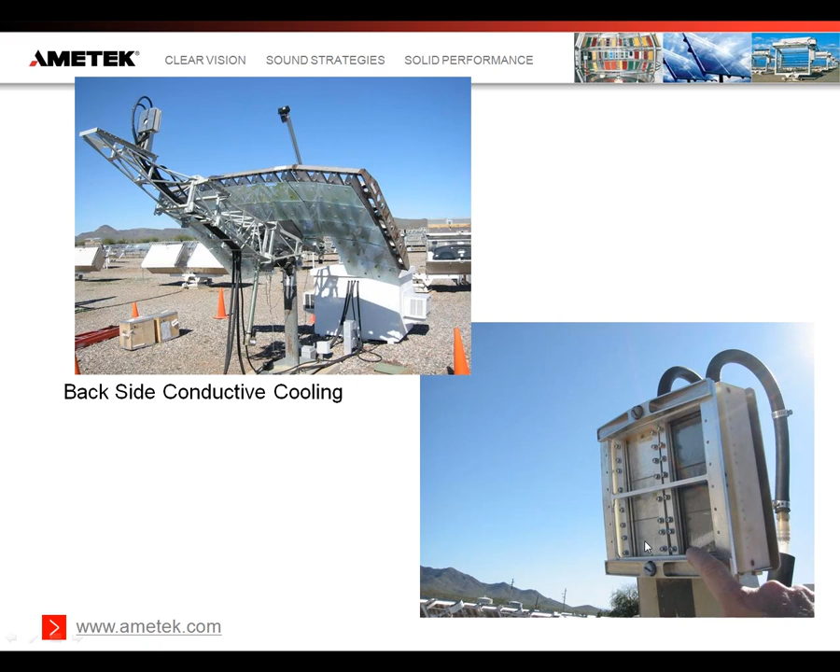This is kind of a poor design for mounting specimens, since if you have any lift off of the specimen from the platen, it'll dramatically affect the backside conductive cooling. But using this, we were able to get reasonable exposure temperatures for some very difficult insulative materials.

Here's a graph showing what we found. We simply drilled a hole into the bulk of the polystyrene and inserted a thermocouple into that plaque. So here at about 9:30 in the morning, we turned on the cooling water. We were at about 28 degrees C ambient air temperature at that time, and we cooled the specimen off with the cooling water.

Then we focused the device at about 10:30, and we watched the temperature rise and rise and rise. If you'd been standing out in the Arizona desert right around 1:30 on this day, you would have heard me screaming about observation not matching prediction. Well, after I had a drink of water and took a deep breath, I found the kink in the cooling hose. When I undid that kink, I saw this dramatic effect of backside conductive cooling, and we saw the temperatures equilibrate in line with the end-use temperature and the ambient temperature here.

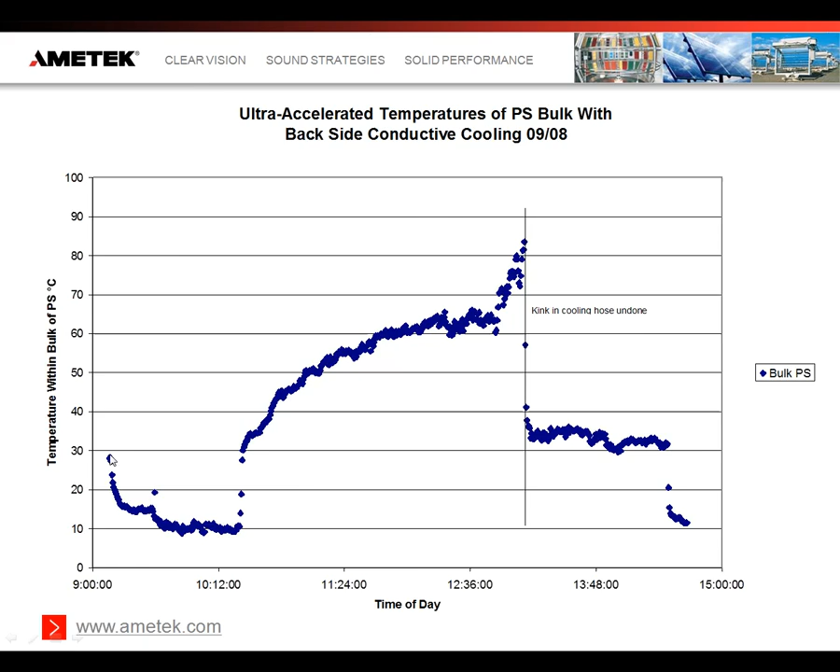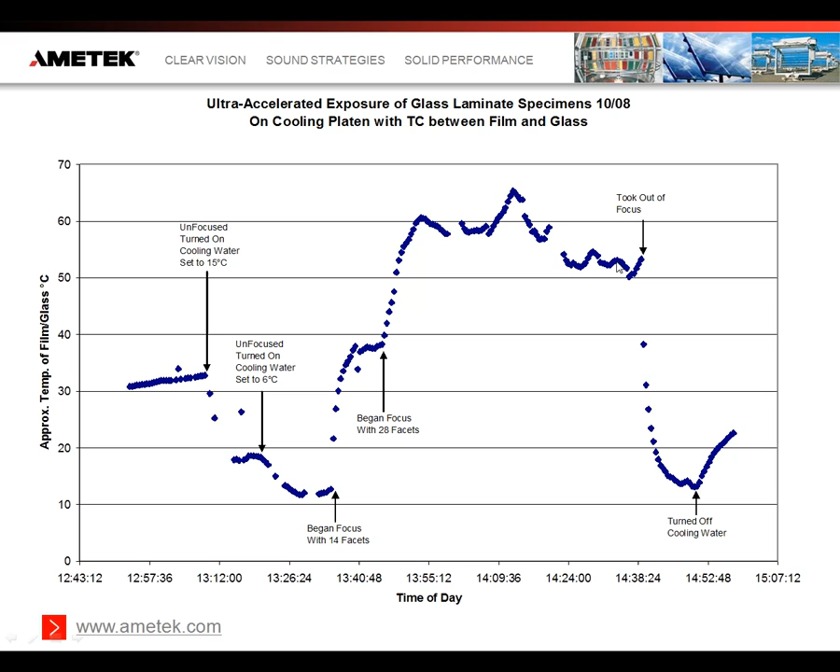Now here's another material where we have thermocouples sandwiched between a transparent film and a transparent cover material, with the film against the cooling platen. We turn on the cooling water and cool the specimen down, then focus the UV into the target area. First we focused with about 50% concentration, which brought us back up around ambient. Then we went to 100% concentration, and we can see where we equilibrated well below that target of 80 degrees C, and we can also see the effect of breezes in the target area. So the backside cooling is very effective, but we're improving the platen.

If there's any gaps between the material and the cooling platen, we have problems. Bolt clamping exerts a lot of clamping force, but it can also cause a sample to deform. So we've developed a vacuum chuck which will actually suck the specimens against the cooling plate. NREL developed this one and helped us develop ours, very similar.

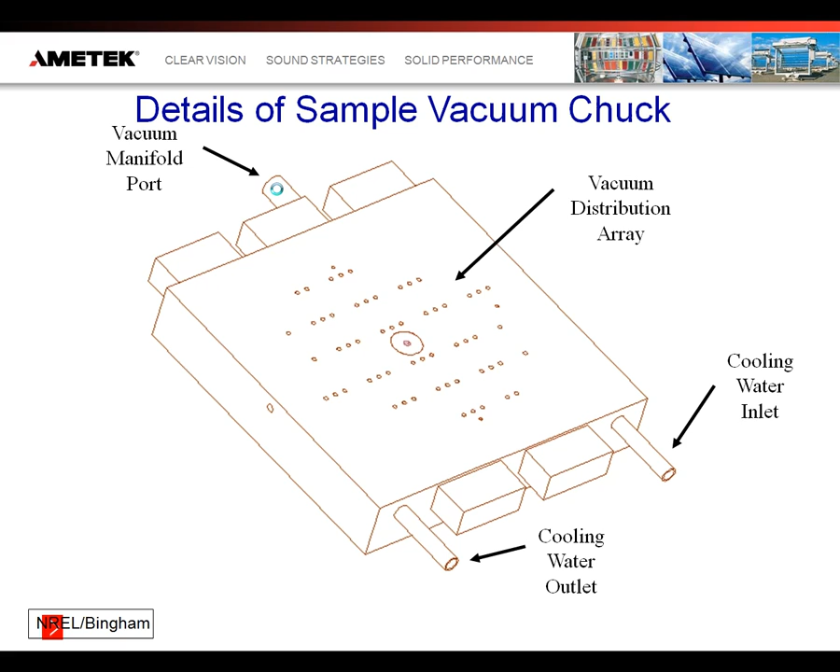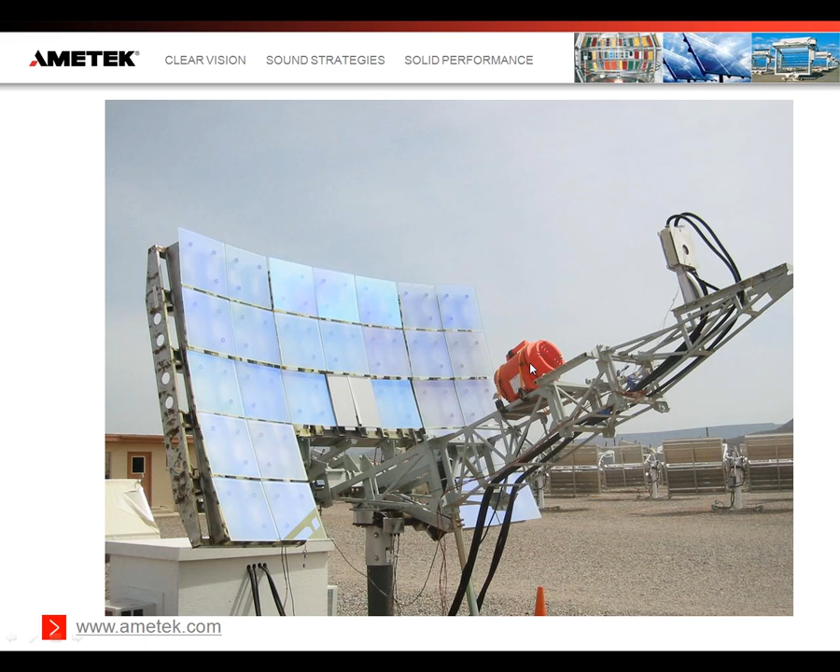The material we're looking at here is a white insulating polyolefin. It's one of the more difficult candidates for ultra-accelerated exposure for two reasons. First, it's opaque, it's thick, and it's very insulative—it doesn't give its heat up to the cooling platen very quickly. Second, the backside is slightly textured, so we don't have the material intimately against the cooling platen. So in this experiment, we drilled a thermocouple into the material and turned on the ultra-accelerated weathering system at 100% capability, and watched the temperature rise until we were right up at the material's critical temperature.

The first customization we tried was to drop the concentration, so we simply covered up some of the facets. You may not believe this, but Atlas was awarded a patent on that customization. It's called variable irradiance. So we can vary the irradiance and keep under this critical temperature simply by reducing the number of mirrors.

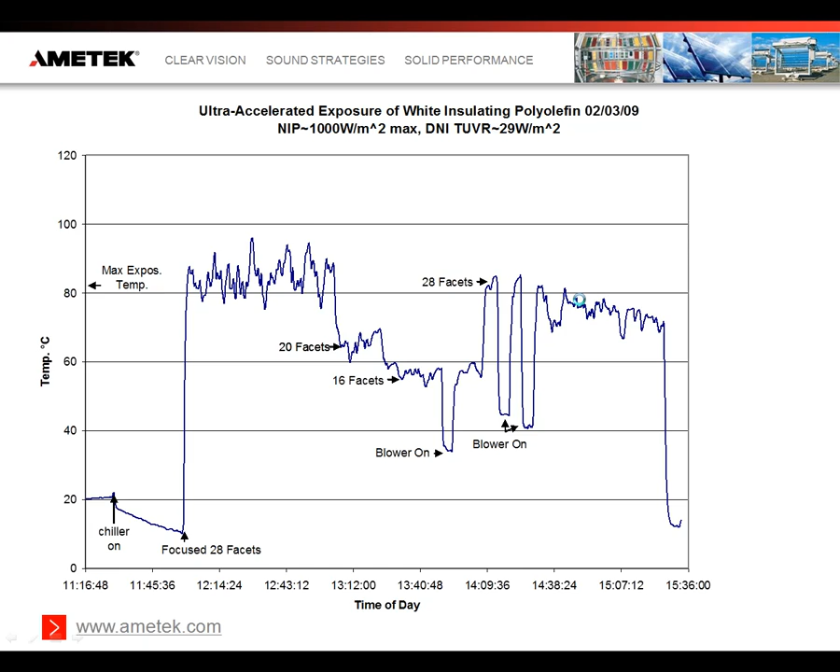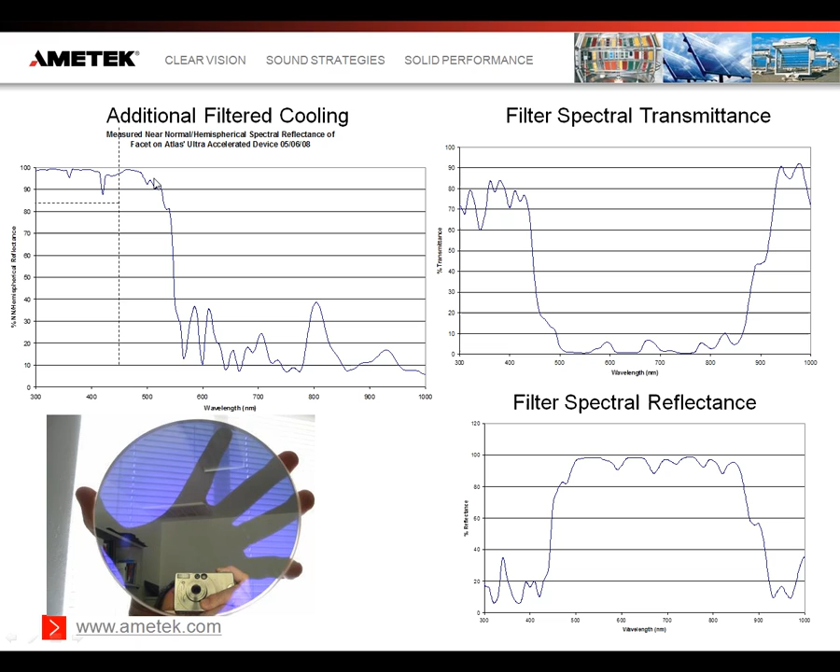Another customization I mentioned before is that if a client doesn't need 100% of the nameplate capability, we can re-aim those facets to another target area. We can have as many as 4 target areas on the device, with different irradiances and different customizations in each. We can have a 50% target with backside cooling and a filter, a 25% target with backside cooling and frontside forced convection, and then two 12% targets with just frontside forced convection, and combinations like that.

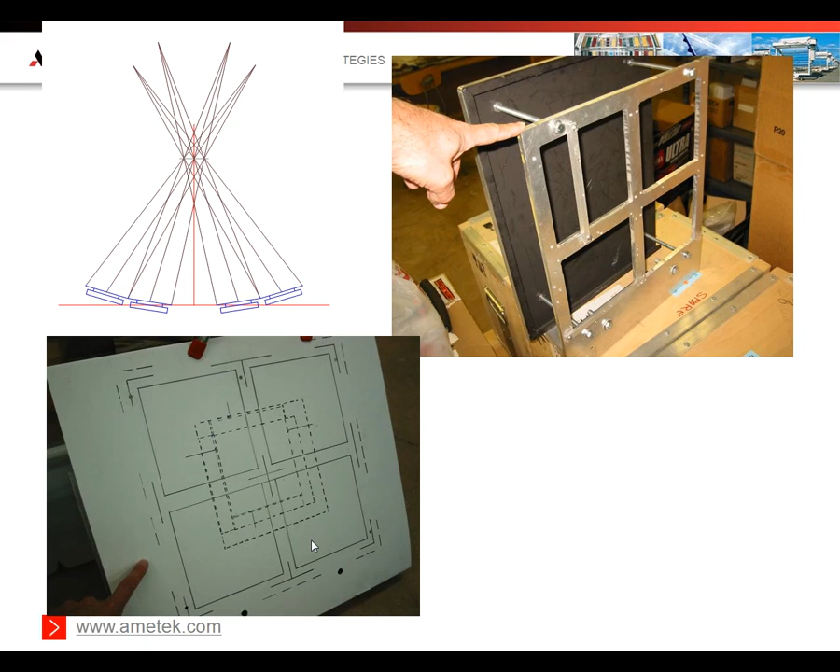We've seen quite a bit of new information today, and new information is being developed every day that we work with these new ultra-accelerated methods. So how do we get more information on this subject? Well, there are a few publications from NREL describing the development of the device, as well as the patent publications. We're also in the process of publishing new information in technical literature, and we delivered a large amount of technical information at the European Weathering Symposium. We hope this is the first in a series of publications that reviews the foundational information that other technical publications can build on. However, we really believe the most important source of information for you will come from you using the system. It's like Yogi Berra says: you can see a lot by looking.

We want to help you develop data around your material systems using this capability. So if you think you might like to take a closer look, please give me a call and let's discuss how we might get you the specific information you need for your testing requirements.

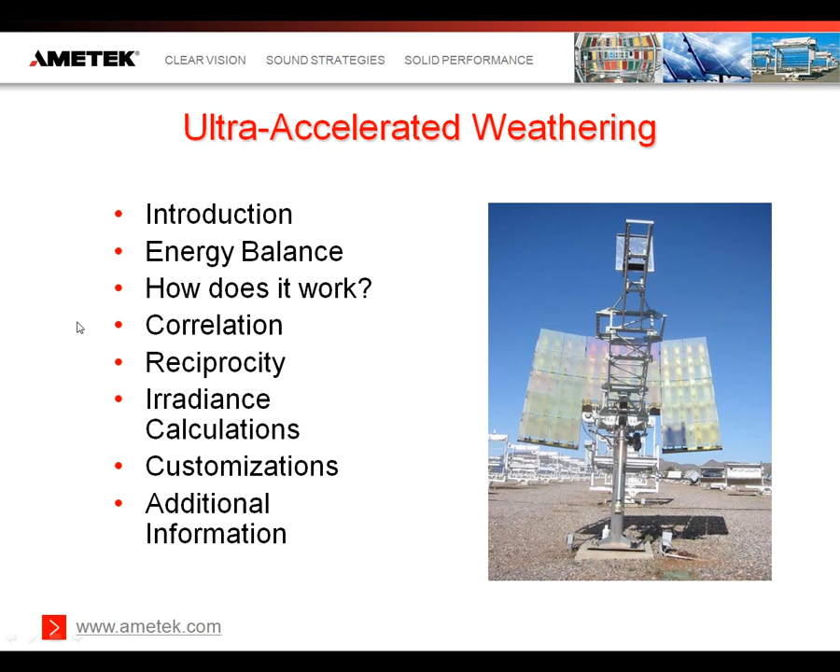Today we've looked at a variety of information, theoretical and empirical, about a new class of weathering methods. We've reviewed a number of considerations for conducting research in ultra-accelerated weathering, both general considerations as well as specific considerations of a single device. I'd like to thank you for your attention, as well as request your comments.